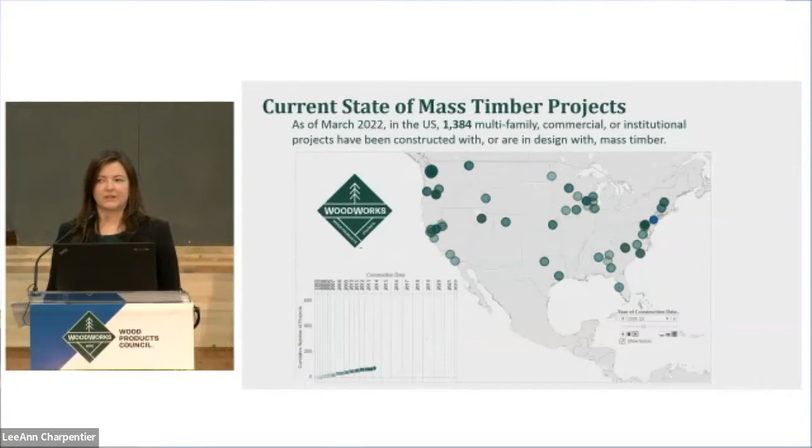We're talking about mass timber today, which is really exciting. We're seeing it really grow here in the country, and we've been tracking it. That's one of the things we do: we track projects across the country, built and in construction, and you can see that exponential growth. Mass timber is an innovative material that's here to stay. So that's what we're talking about today, and that's really exciting.

One other thing I want to mention is the WoodWorks Innovation Network. All the project assistance we do is confidential, but we wanted a way for project teams to showcase their built and in-construction projects. There are a lot of amazing project photos uploaded there. It's kind of like the Facebook of mass timber projects, I'd like to say. You can go there and see what's built and in construction around the country, and filter it by location, building type, size, material, and more. It's a great resource if you want to see what's going on.

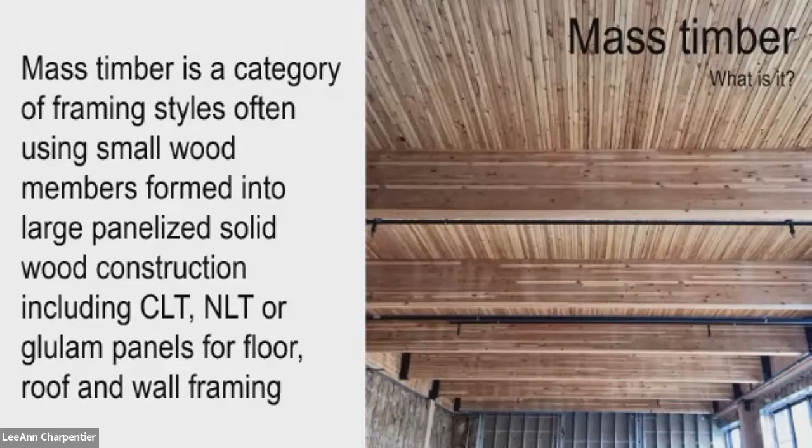What is mass timber? I like to think of the delineation between mass timber and heavy timber. Heavy timber is the historic method of construction, a solid 8x8 column, a 10x14 solid wood beam. Mass timber can have these same sizes, but it's made up of a number of smaller individual members that are laminated together, either using adhesives, nails, screws, or another type of mechanical fastening.

All right, so that's mass timber, that umbrella definition. Let's talk about some of the products. Glue laminated timber, glue lam, are often beams and columns in these buildings. We've been using glue lams for over 100 years, in light frame construction for longer spans, and now we're using them in these mass timber buildings exposed as our beams and columns.

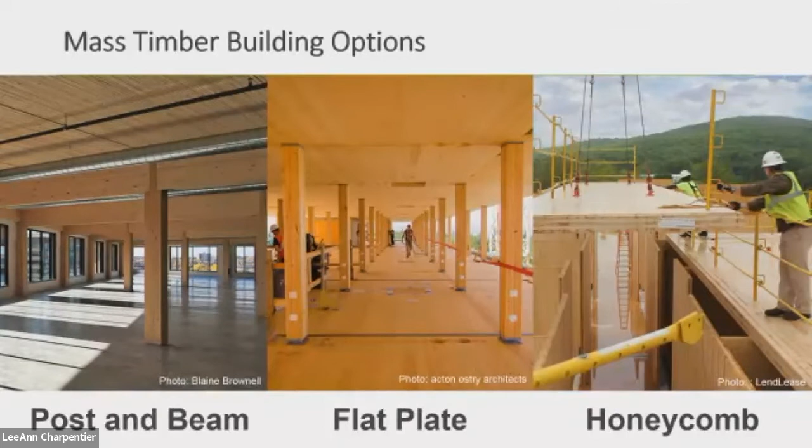We also don't have to have an entire mass timber building. For multifamily, low and mid-rise, we've seen CLT floors with prefab panelized walls used very successfully, basically replacing the floor system, the TJI joists, with CLT panels spanning to wood-bearing walls. Steel hybrid is also an option, and we've seen this in a lot of office projects. So maybe this is the best fit for a project.

I'm going to focus on CLT a little more and how it's made, since we're talking about this a lot today. For CLT, we're basically taking 2x lumber, laying them down, typically 1 and 3/8 inch thick, putting down a screen and adhesive, and then the next layer is cross, so that's how we get that two-way action. We usually have an odd number of plies, so 3-ply, 5-ply, 7-ply. The reason is those outer plies run the long direction, considered the major strength axis, and the opposite direction is the minor weak axis, going the short dimension of the panel. So unlike NLT, DLT, GLT, there is strength in 2 directions.

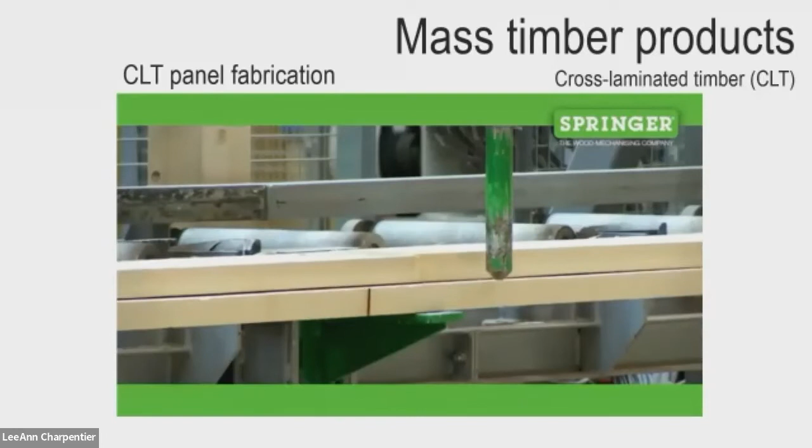I have a short video here to show you how CLT is made. We start with that commodity lumber I mentioned. The first thing they do is finger join it end on end, so we can have these longer panels. Panels are, depending on the manufacturer, 4 to 12 feet wide, 40 to 60 feet long. Those pieces are then cut to size.

Each panel is made for a specific location on a specific project. First they get that layer of adhesive down on top of the first ply, and now that second ply goes on, cross-laid. There's the door opening, or a window opening, on this panel. That third ply then gets installed, all very automated in a factory. The last step is to go through the planer, and now we have a 3-ply panel.

So CLT is all prefabricated. We're not going to a local lumber yard and saying I need 8 sheets of CLT. It's done for a specific project where you have specific panel sizes, openings, a lot of upfront coordination. Everything's done in 3D, shop drawings, and very precise, with tolerances of 1/16 to 1/8 of an inch for these panels.

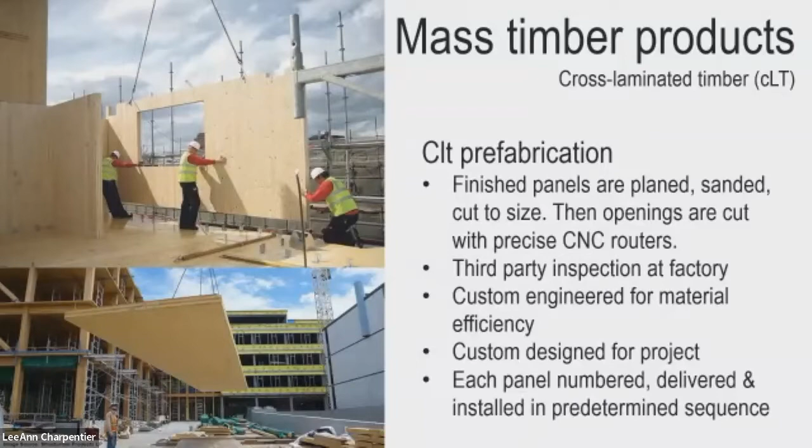We have some issues on the slide, sorry about that, but I'm going to go through some project examples now, looking at built and in-construction projects, focusing here in the Bay Area and also around the country.

One example is 1 De Haro, in San Francisco, a 4-story office building, 130,000 square feet. They had significant savings on this project because of the reduction in weight with mass timber. They took the building pretty far through design in concrete, then switched to mass timber. It's in SoMa, which has poor soil conditions, so they had to use deep foundations, and they were able to significantly reduce those by switching to the lighter weight material.

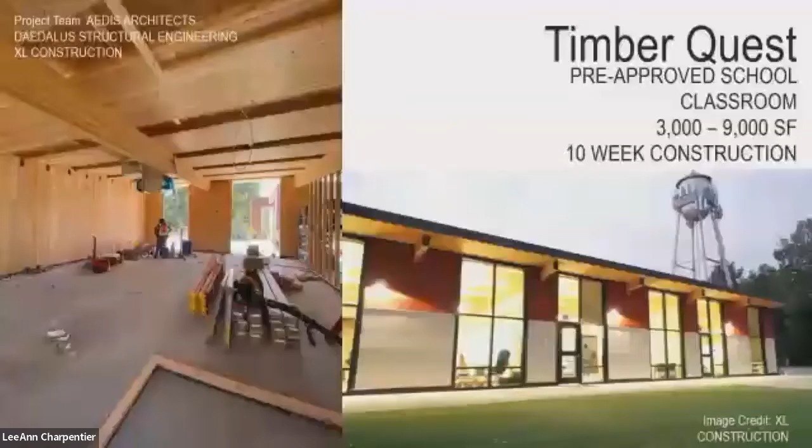A local project here, Timber Quest. Mass timber typically makes sense on a larger scale - we typically see them larger than this 3,000 to 9,000 square foot range. But this is an exciting new prefab option here in California, intended to be a classroom, and it's DSA pre-approved. It could also be a community center or other uses. The idea is to replace modular classrooms with higher quality, cost-competitive, sustainable solutions.

I think they had an off-site staging area, and they trucked the panels in place. They also trucked in the walls, which were all prefabricated off-site. The contractor said it was originally all designed with light frame wood, with a 14-month construction window. When they used the prefabricated solutions, it was cut down to a 10-month construction schedule.

All right, so thinking about tall wood now. There isn't anything in construction yet in California. We have a lot of upcoming exciting projects in design, and maybe we'll hear about them later today. But there are some projects in construction around the country using the Tallwood provisions.

So this is Intro in Cleveland, 9 stories above grade, 8 stories of mass timber on top of a 1-story concrete podium. Really big project, over 500,000 square feet, nearly 300 apartments. It has some ground floor retail and an events venue on the top floor.

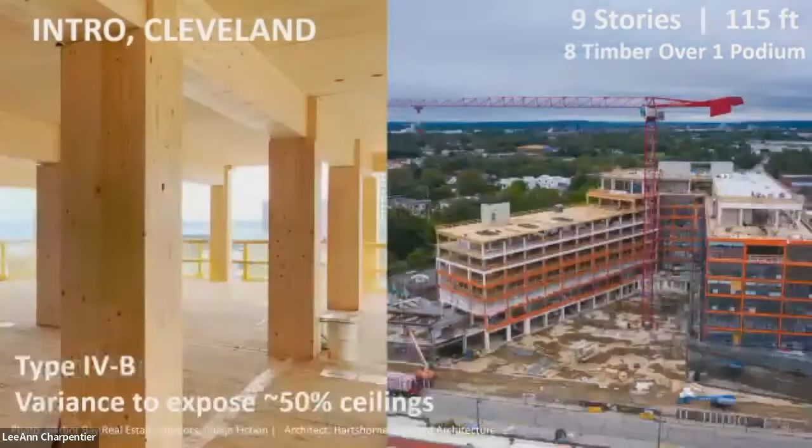So this is one of the first projects to utilize the new construction type 4B with modifications. The City of Cleveland has not adopted the new 2021 IBC Tallwood code provisions we're talking about today. So the project did need to apply for an AMMR, an alternate means and methods request, looking ahead to the coming code.

Ascent in Milwaukee is also currently under construction. When complete, it's scheduled to be the tallest mass timber building in the world, and it did top out in December 2021. So it's 284 feet, 25 stories in total.

So it is a hybrid project. The first 6 stories are concrete, 19 stories above that are mass timber, and there are concrete cores that go all the way up to the roof. You can see those concrete cores on the right.

Ascent is using a modified Type 4 approach. Along with the fire engineer consultant, they worked closely with the city to express design project goals, aesthetics, and the safety measures taken. So one of the requirements they had was to perform the first 3-hour fire tests of glulam columns, which they did at the USDA Forest Products Lab in Madison, Wisconsin. So they actually utilized some of the design requirements of Type 1A construction while incorporating mass timber.

So how do we get our required fire rating with mass timber exposed like this? This is what many of our speakers will be talking about today. I'm really looking forward to hearing about this more, but I did want to introduce it here.

Wood, as it burns—mass timber, heavy timber in particular—burns at a rate we can predict very accurately. It burns fairly slowly. As it burns, it's forming this char layer on the outside of the exposed surfaces. What that char layer is doing is insulating the inner wood, keeping it cold so it can retain its structural properties. So through numerous tests that have been done over the years, we can very accurately predict at what rate this char layer will form.

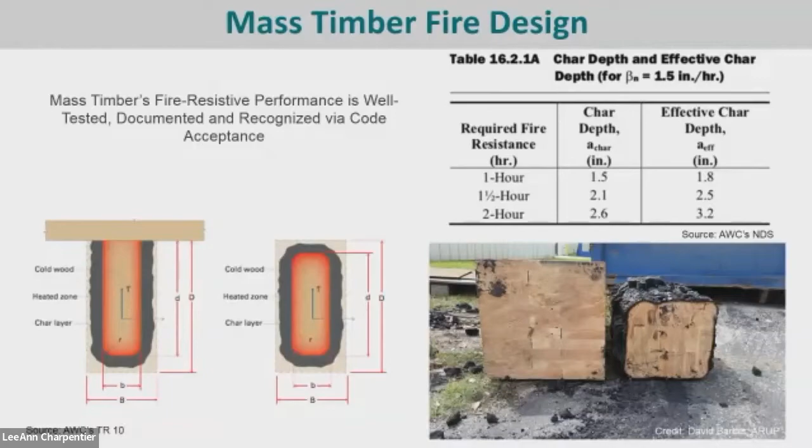All right, so let's take a look at lateral systems. Code process turns slowly—CLT shear walls are almost adopted. We do have R values in ASCE 7-22, which has been published recently. And the NDS SDPWS, our special design provisions for wind and seismic, has prescriptive detailing and design procedures.

How are those panels connected together to create that structural diaphragm? Questions that come up, particularly in California. There are a few different ways to do it.

This is most common, this plywood spline or surface spline detail. The manufacturer can leave a small section of each CLT out, or remove a portion of it on the top side. Then we're just installing the strip of plywood or thin veneer, nailing or screwing it down, tying that diaphragm together. So there are provisions in the new NDS special design provisions for wind and seismic that will be adopted in the next code cycle.

And I know project teams around the Bay Area and around the country are already starting to use these provisions, and fortunately they are being accepted.

All right, so I talked about framing approaches earlier, and we've seen a lot of post and beam around the country in different projects. So I wanted to talk about different options we have, and how differently we can solve one connection. On the left is one probably fabricated by a steel fabricator, designed by the structural engineer.

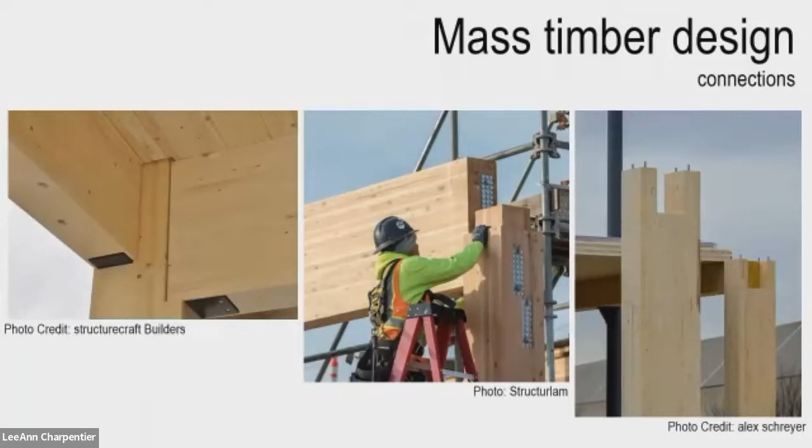All right, so acoustics - we're not really diving into the details on this today, but I do like to talk about it because it's one of the many things we need to think about in these buildings. The lightweightness of mass timber helps us for a lot of things like installation, reducing those foundations. It kind of hurts us on this acoustics. So we're going to be adding assembly on top of our panels. We won't just have bare panel. Part of that is because it's a softwood product, so it's not a durable walking surface.

So we're typically exposing that ceiling side, putting Acousti-Mat on top. There's a lot of different options for that. And then 1.5 to say 4 inches of gypcrete or concrete, and that can be your finished floor, or often we're adding in like another acoustic layer and then the finished floor on top.

All right, so the why of mass timber. Why are we talking about this here today? Why is it gaining popularity? Katie Harrell will be talking next in a few minutes here about why here for California we want to use mass timber, why we want to increase its use. But I want to just kind of touch on the overall topics.

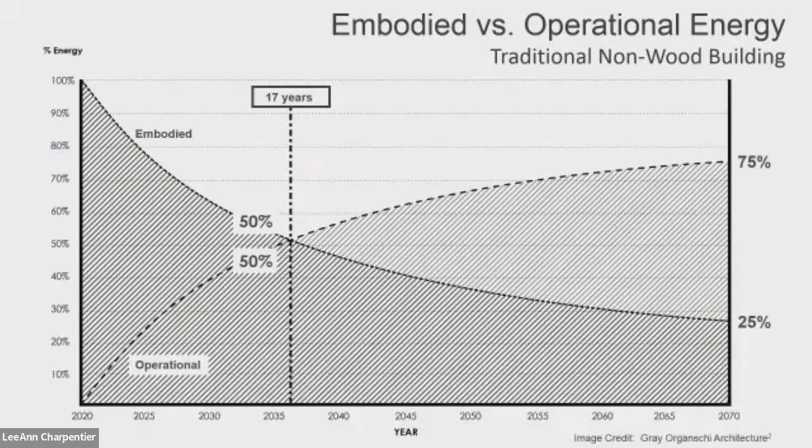So what can help with that? Wood. Wood is 49% carbon by mass or weight. So 50% of this wood is carbon that was in our atmosphere contributing to global warming, and is now physically converted into a solid form of wood and put into a building. So whole building life cycle assessments typically show wood buildings as a way to reduce the embodied carbon footprint of a structure. We do have a life cycle assessment that we recently released of a mass timber office building in Denver called Platte Fifteen.

Left to natural processes, that tree will die and decay, releasing carbon back into the atmosphere. Instead, carbon can continue to be stored by using that solid material in buildings and building products. So throughout the life of a wood building, it's basically acting as a carbon sink, storing that carbon dioxide. One thing to note - it's only sustainable if the forest is sustainable, if the forest remains a forest after the tree was harvested. Here in North America, forests have been very well maintained and stable for the last 100 years, and there are a number of regulations that ensure this. That's something Katie Harrell will be talking about more shortly, forests here in California.

Another why for wood, for mass timber, is exposing it, biophilia. It's this innate human instinct to connect with nature. We feel good around wood. Studies have shown it. We also hear from developers of mass timber projects that they're seeing faster leasing and higher lease rates, and this is shown in our business case study available on our website.

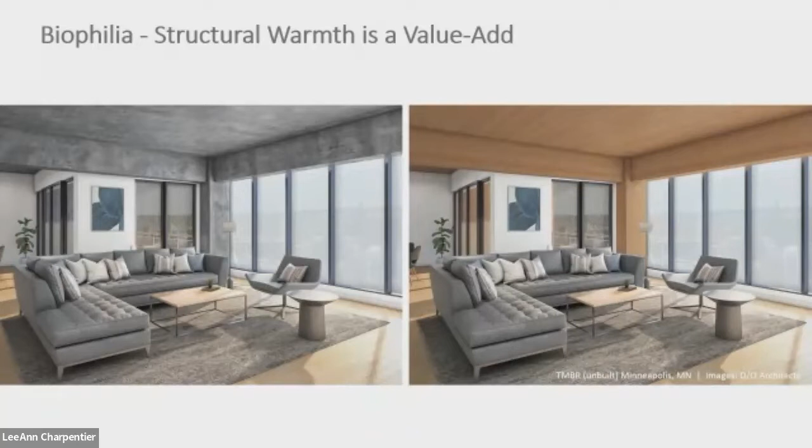Another driving factor, or why, of mass timber is worker availability and shortages. It's existed for many years, driven really by the recession of 2008 and 2009, and the construction industry never really recovered from that. Coupled with urban settings, where labor tends to be very expensive, mass timber is a way to integrate off-site construction. The crew on-site can be smaller, and we're creating more jobs off-site in a safer work environment.

This point ties to the previous one. Compressing construction schedules will reduce the requirements of labor, requiring less time of folks on site. Time is money, and mass timber helps with this. It requires a lot of coordination up front, but when it gets to site, it goes up like a set of Legos or IKEA furniture—very quickly. A feasibility study on a 12-story tower in Seattle compared a concrete construction schedule to a mass timber construction schedule for the same project, and they determined there was a 5-month savings with mass timber.

So that's our market drivers, the why of mass timber, and I think we'll be hearing more about some of these today.

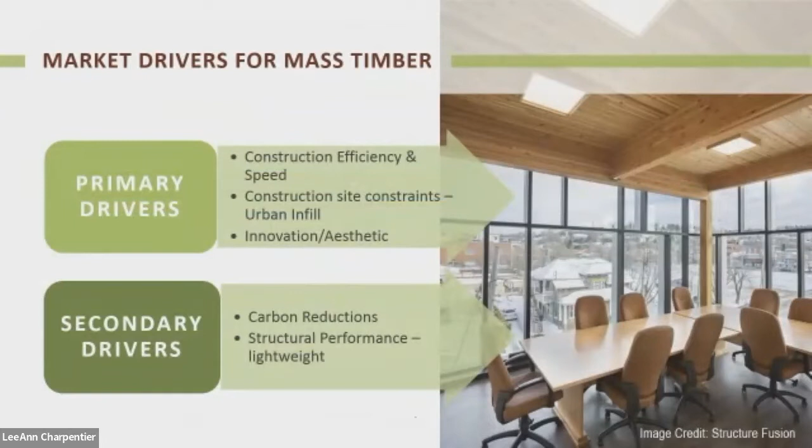All right, I'm just going to touch on the code briefly. We're going to hear more about the code from other speakers, but I want to introduce some ideas here. A question comes up often: is CLT in the building code? People ask me that, and the answer is yes. It first arrived in the 2015 IBC and 2016 CBC. It's defined in Chapter 2 as a structural wood product, and it's referenced in Chapter 23 as an acceptable building material when manufactured according to the PRG 320 standard.

So how tall can we build? Before the Tallwood code provisions that will be discussed more today, we were limited to 6 stories for business office occupancy, 5 stories for residential, and 85 feet, with type 3, type 4, and type 5 construction types. The nice thing is we can add mezzanines, and we can put it on a podium. So we do have options to make bigger buildings, but we wanted to go taller.

So in 2016, the Tallwood Ad Hoc Committee was created to explore this here in the States and push forward new code provisions. Five full-scale mass timber fire tests in a multi-story apartment building were conducted at the ATF lab in 2017, and Ray Obrockie from AWC will be speaking more about these tests in depth in about a half hour. Given the success of the tests we'll be looking at, the Ad Hoc Committee proposed 17 revisions to the IBC, and they were included in the 2021 IBC. All of them passed.

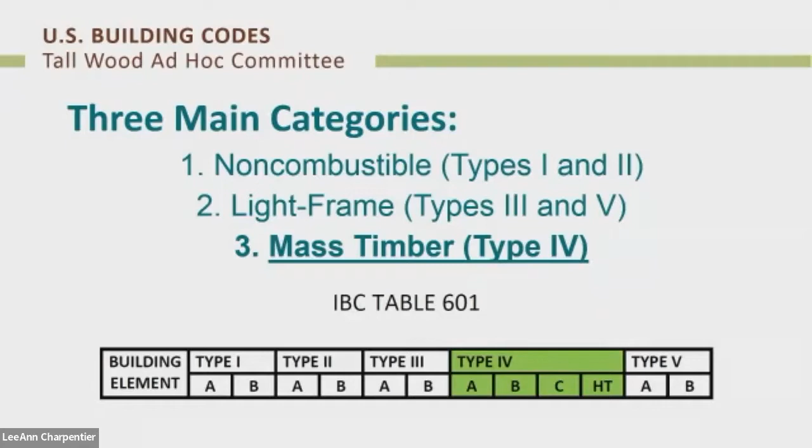So we have 3 new construction types, under the type 4 construction type. We didn't want to touch the existing type 4, so that became type 4 HT, type 4 heavy timber. Now we have type 4A, B, and C, and we can see how tall we can go with this. Type 4A allows up to 18 stories, type 4B up to 12 stories, and type 4C up to 9 stories. The differences between these really come down to increasing fire safety the taller we get, so type 4B and 4C have lower fire ratings compared to type 4A.

And there's also this new concept of exposure level in mass timber—how much timber can we expose? These were adopted early here in California, and we have Chief Greg Anderson with us today. He's the Chief of Code Development and Analysis for CAL FIRE, and he'll be speaking more about the specific adoption here in California.

I do like to share this quote from our State Fire Marshal, Chief Mike Richwine. He says the early adoption of mass timber codes can benefit California in many ways, but I'd like to highlight three. It has the potential to increase market demand for mass timber production in California to meet the needs of the construction industry. It will increase the pace and scale of our wildland fire prevention and forest management goals of treating 500,000 acres per year by thinning the forest to smaller diameter trees that can be used in the production of cross-laminated timber and other mass timber assemblies. While wood products provide the benefit of storing carbon, another advantage is that mass timber construction can help reduce the carbon footprint of concrete and steel production.

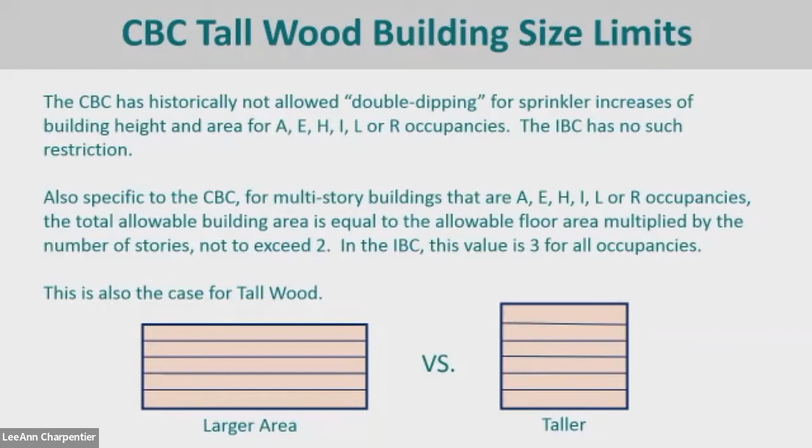Also specific to the CBC, for multi-story buildings the total allowable area equals the allowable floor area multiplied by the number of stories, not to exceed 2, for those same occupancies specifically. This value is 3 in the IBC.

So what does that mean? For example, if we're using the sprinkler area increases, the allowable height in the CBC is 20 feet and 1 story less than the IBC limits for these new construction types, as with all construction types. When we add sprinklers, no sprinklers were limited to 65 feet across the board for all these.

Let's say we take a residential building, we want type 4B. We can either take that area increase, so we lose that top story—we have 11 stories allowed, 160 feet. We have 123,000 square feet allowed per floor, but the max total building is 2 times that. So that's the big number at the bottom, 246,000 square feet total—that's our total building area allowed.

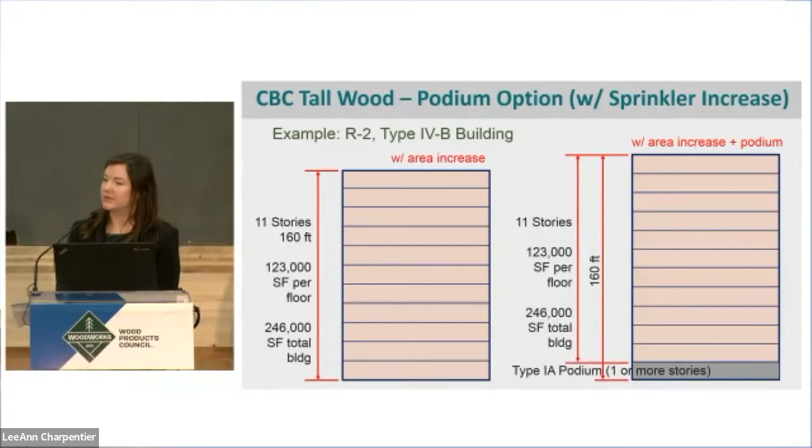All right, so that's all I have for you, this intro to mass timber.

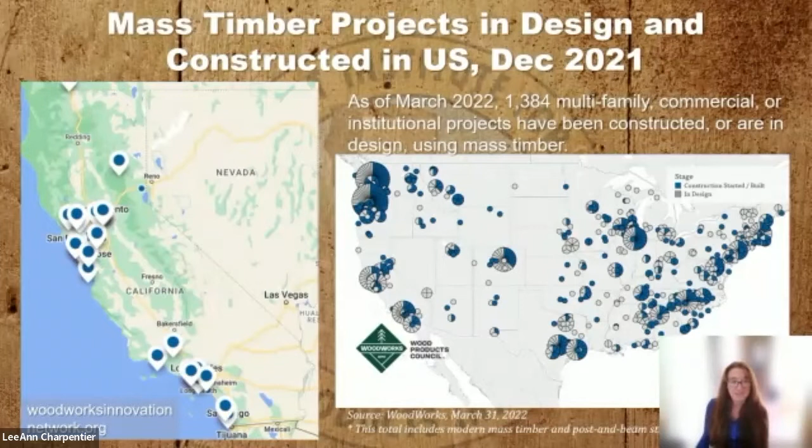As of December 2021, there are 199 mass timber projects in California that either are completed or are underway, more than any other state in the country. Washington is next at 126 projects, and Oregon is in third at 94 projects, with Texas close behind Oregon. Really, this slide is just to highlight the demand and interest in the state are clearly here for mass timber.

The Joint Institute for Wood Products Innovation is another indicator the state is committed to increasing the use of innovative wood products. We first convened in 2019.

We have 2 co-chairs, the chair of the California Board of Forestry and Fire Protection, and the California Natural Resources Agency Deputy Secretary for Forest and Wildland Resilience. We have 2 academic members and 11 council members with various areas of expertise, including forestry, industry, tribal interests, and finance. We're dedicated to providing California forest product information, research, and analysis to increase economic drivers for healthy forests.

Our areas of focus include long-term ecological and economic sustainability, education and outreach, increased forest resilience, long-term carbon storage, local economies, and industry retention and development in California.

Our first report was a literature review and research gap analysis of innovative wood products, which we released in 2020 and hired UC Berkeley to produce. Findings included identifying mass timber as a current, promising market-ready innovative wood product.

As a result, we funded research with the Tallwood Design Institute to look at cross-laminated timber layup tests using white fir species. We tested 2 different product layups using lumber grades 2 and 3 or better, with the intent of informing industry looking to come to California.

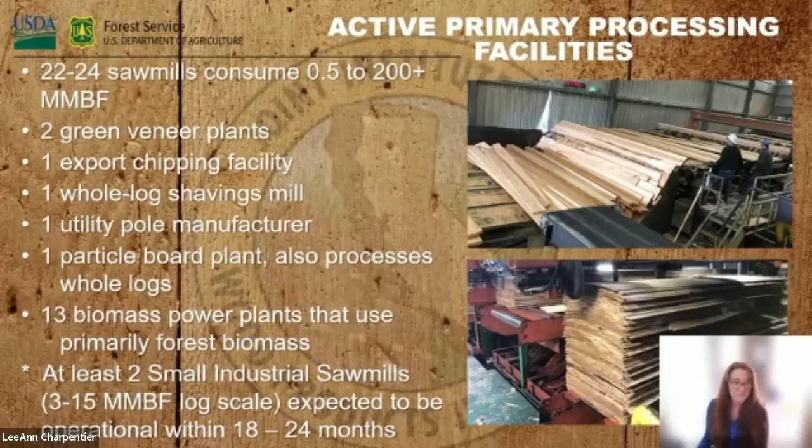Recognizing the need to implement a comprehensive statewide plan to address issues such as a lack of wood processing capacity and other forest health related issues, the state developed the Wildfire and Forest Resilience Action Plan, released in 2021. It includes areas of focus, one of which is wood utilization, and it advances California's sustainable forest management goals. It lists the action items that need to be met and will get us to where we need to go for each topic. Wood utilization items include helping to attract and support private sector investments for an expanded wood products market.

The Climate Catalyst Fund, based at iBank and the Governor's Office of Business and Economic Development, is one of the programs in the action plan. Its goals are to engage investment opportunities, provide technical assistance across all 58 counties, and emphasize inclusive prosperity in the climate transition. It has $74 million available, of which $47 million is available in loans for forestry projects, such as advanced energy products, existing and emerging construction materials, and supporting infrastructure and industries needed to make such products viable.

The intent of the loans is to help stand up a more robust wood product sector in the state, reduce wildfire risks, promote forest and watershed health, and contribute to more climate resilient communities and economies. The fund makes public dollars available to help bridge financing gaps currently preventing technologies from scaling into the marketplace. When recipients pay the loans back, those dollars return to the fund for other projects that need gap financing.

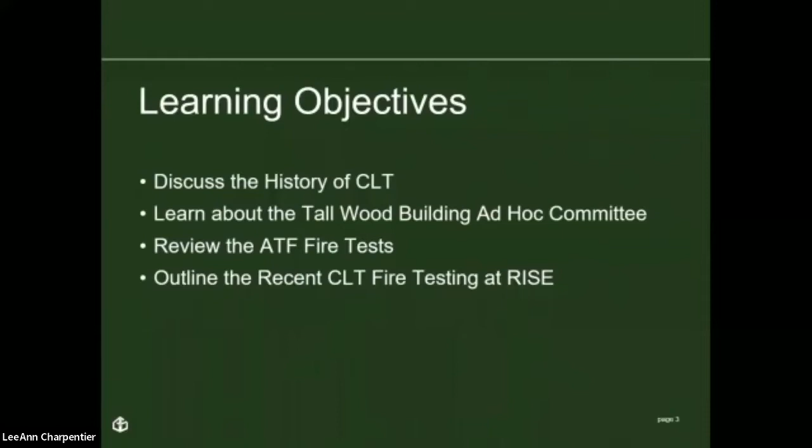We're going to discuss the history of cross-laminated timber. We're going to learn about the Tall Wood Building Ad Hoc Committee, because the testing originated out of the fire working group of that committee. We're going to review the ATF fire test, and then outline the most recent CLT fire testing at the Research Institute of Sweden.

Mass timber as a separate building system was really born because of one new product, cross-laminated timber, or CLT. CLT represents a sea change in wood construction because of the new structural and fire resistance characteristics it represents for wood construction. Never before have we contemplated solid wood floors and wall sections used in a similar manner as concrete walls and floors.

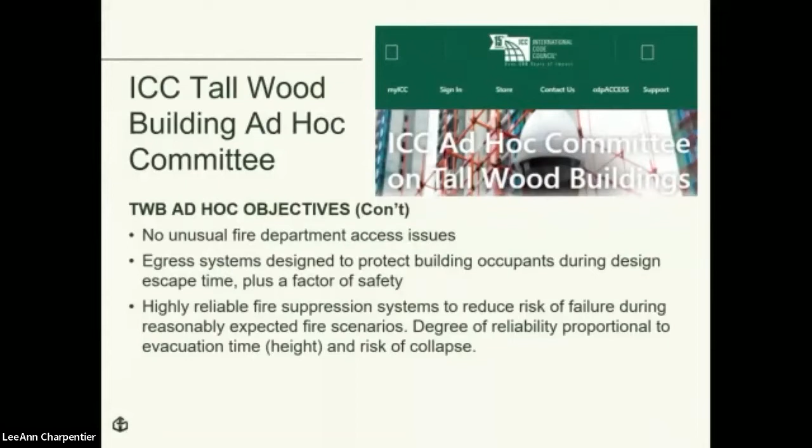I say the word weighs in the present tense because after the fire test series was over, the CLT was salvaged and repurposed for construction of residential buildings by architecture students at Yale University. So as you can see, CLT can be used in a horizontal application, like a floor or ceiling, or a vertical application as a wall.

Early on, the Tall Wood Building Ad Hoc Committee recognized it would need fire testing to validate its proposals. So the fire work group developed fire test scenarios, including the physical layout of the test structure, the configuration, and the fuel load.

The test structure represented a multi-story condominium in which each unit had interior dimensions of 30 by 30, with modern furnishings, not legacy furnishings - modern furnishings being a lot of polystyrene, foam, and plastics instead of the traditional natural fabrics and cotton batting. The fuel load was based on a North American study of fuel loading for residential use groups. They took the mean average of that study, added one standard deviation, and came up with 570 megajoules per meter squared as the fuel load.

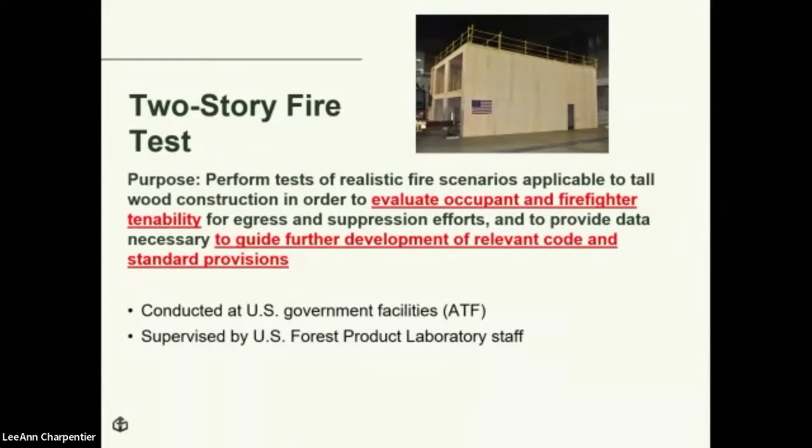As I said before, the 570 megajoules per meter squared is essentially equivalent to about 400 gallons of gasoline, energy-wise, when you look at it.

So here are all 5 of the fire tests. Test 1, the so-called baseline test, had all mass timber surfaces protected with 2 layers of 5/8 inch type X gypsum wallboard, which is a fire-rated gypsum wallboard, so none of the CLT was exposed. This also did not have sprinklers, and there was no intervention to suppress this fire.

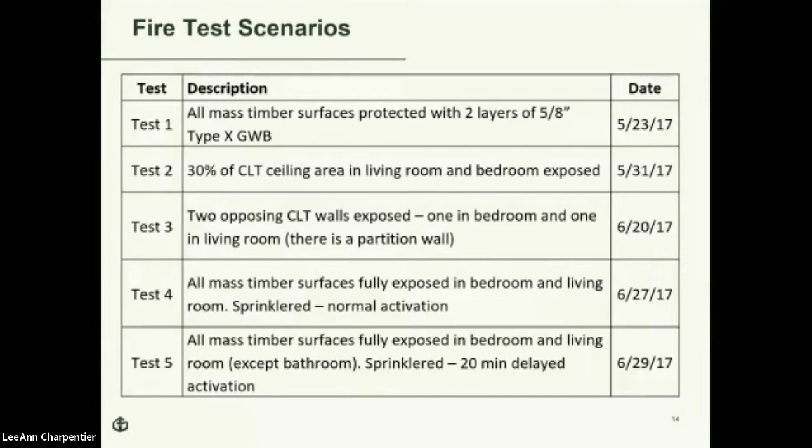So each unit had plumbing, mechanical, and electrical penetrations, but no utilities were connected. They also had through-penetrations that were fire stopped, just to examine the efficacy of that requirement for mass timber.

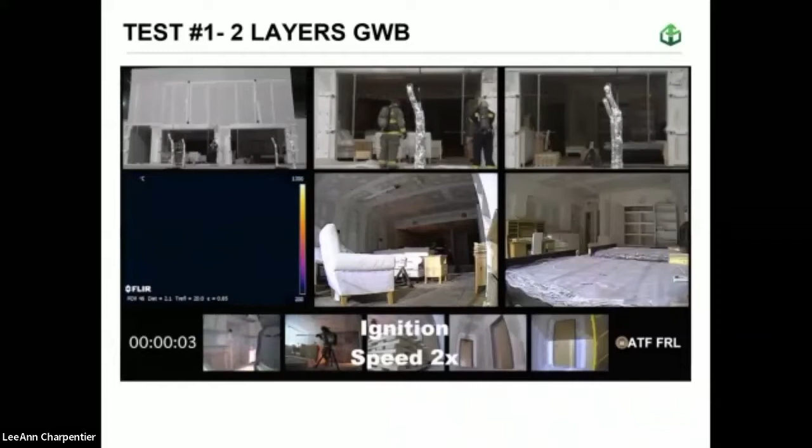So all of the fires were started in the same fashion—with a propane torch that lit gasoline-soaked rags off in a pan in a corner base cabinet of the kitchen. And as I said, these things were fully instrumented; there were 420 channels of data collected during each one of these fires.

Also note, down in the lower right-hand quadrant, you have the 20-minute door to the hallway and the 90-minute door to the stair tower. So the fire starts very quickly.

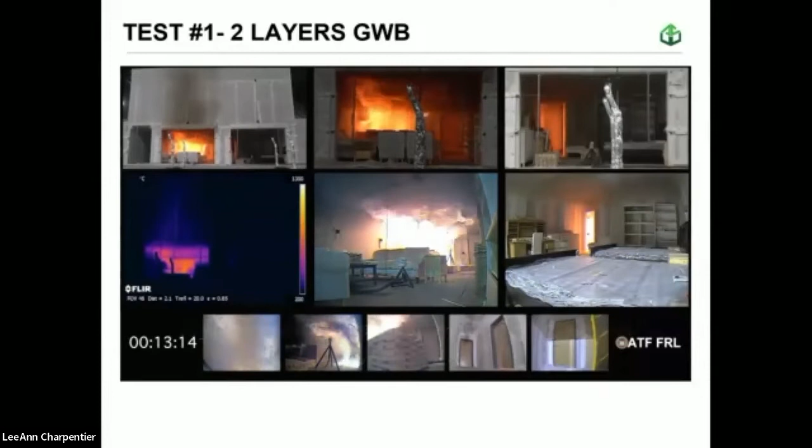As I said, that 570 megajoules per meter squared was the fire load. Now, the original test protocol called for glazing on the front of these openings, but the engineers at the ATF lab wanted a high-intensity fire, so they left the glazing out to create more ventilation.

Now you have the living room and kitchen in flashover right now, at around 13 minutes. Flashover, for laboratory purposes, was 600 degrees Celsius, 1 inch from the ceiling, which is about 1112 degrees Fahrenheit.

So you're going to see that the door was left open between the kitchen and the bedroom. The bed is starting to off-gas now, and this room will be fully involved within 17 to 18 minutes. You see a little bit of smoke in the hallway, none in the stair tower. That 20-minute door actually lasts a lot longer than 20 minutes.

So now we have a fire that's absolutely free burning. It's in full flashover condition. This fire actually got to 23 megawatts.

And to put that in perspective, a really hot campfire—one you can stand next to for a couple of minutes—is like 300 to 500 kilowatts. So this is like 45 times the intensity of that.

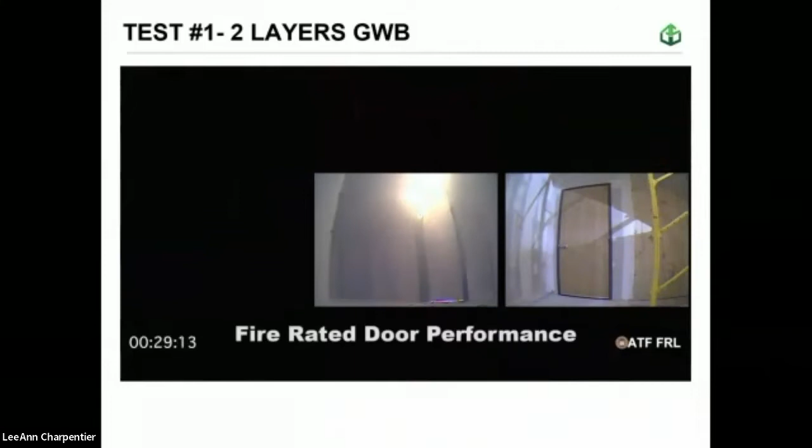So you see a little bit of fire coming through that 20-minute door, which is hanging in there for now 35 minutes. It's going to hang in a lot longer—it's not going to fail until almost an hour when it comes to staying in the door jamb.

So this wasn't the first generation of CLT fire testing. There was actually testing at NIST.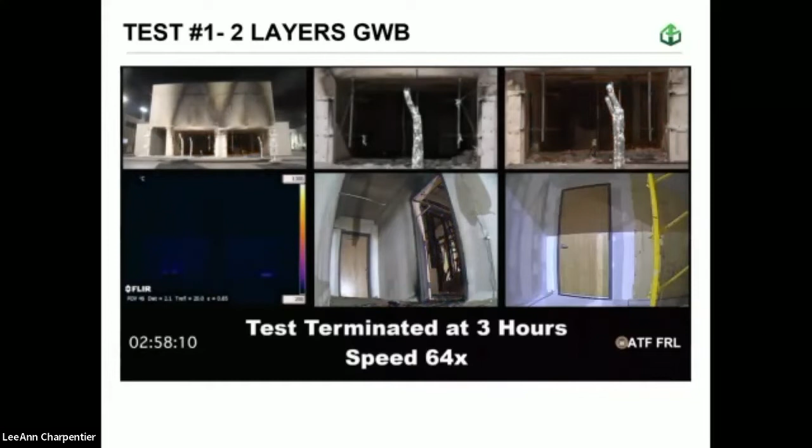You see the fire is well into the decay phase when the door fails. No smoke or flame even enters into the hallway. The hallway was very tenable the whole time for occupants to get out, firefighters to get in. The test is terminated at 3 hours, and you can see that it didn't leave the compartment of origin.

These are just still photos. The fire ignites, flashes over around 12 and a half, 13 minutes. At the peak heat release rate, over 20 megawatts.

The fire was allowed to burn without intervention. You can see in the bedroom and the kitchen, all of the contents were completely consumed by the fire. The ATF firefighters didn't clean out this compartment. Everything was completely consumed. That's how intense this fire was after about an hour and a half.

Now, test 2 exposed 30% of the ceilings. They also used barrels over top of that exposed portion of the CLT. They wanted to see what a live load would do to the exposed CLT.

This test starts the same exact way. It's in the corner base cabinet of the kitchen. 30% of the CLT ceiling area in the living room and bedroom was exposed. That amounted to 20% of the overall ceiling area.

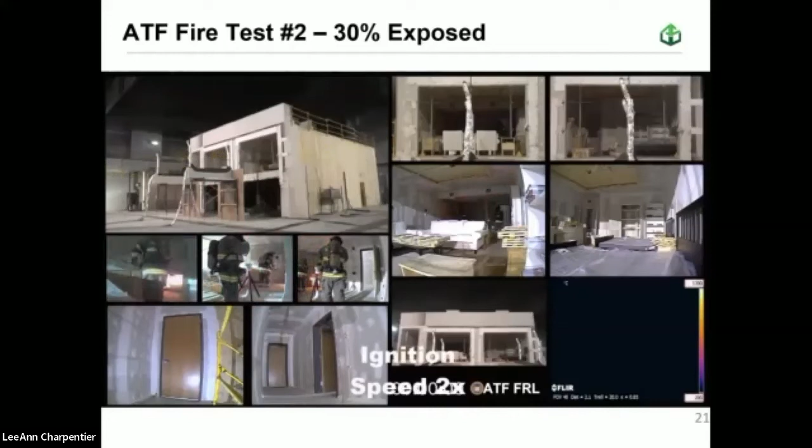If you noted in the last test, the steel studs and the gypboard wall partitions that were in between the glulam beams and columns were completely consumed by the fire.

It should be noted that no combustible materials are allowed in concealed space areas. So you can expose the ceiling, but you can't enclose it into a concealed space. That's part of the adopted codes. And actually, this has 30% of the ceiling exposed.

I'm going to telegraph that the code now allows for 100% of the ceilings exposed in the 2024 edition of the IBC that I'll talk about, and that came out of the RISE testing.

In 2016, the first Tallwood building, known as Brock Commons Residential Hall, was started at the University of British Columbia in Vancouver, Canada. That's 18 stories, and that was the tallest structure in North America utilizing mass timber.

There's currently a building almost complete in Milwaukee called the Ascent that's going to be 25 stories. It's 19 stories of CLT over top of a 6-story cast-in-place concrete podium parking garage.

So right around 12-13 minutes in test 2, you see flashover in the living room kitchen. It starts to also spread into the bedroom. This test goes very much like test 1.

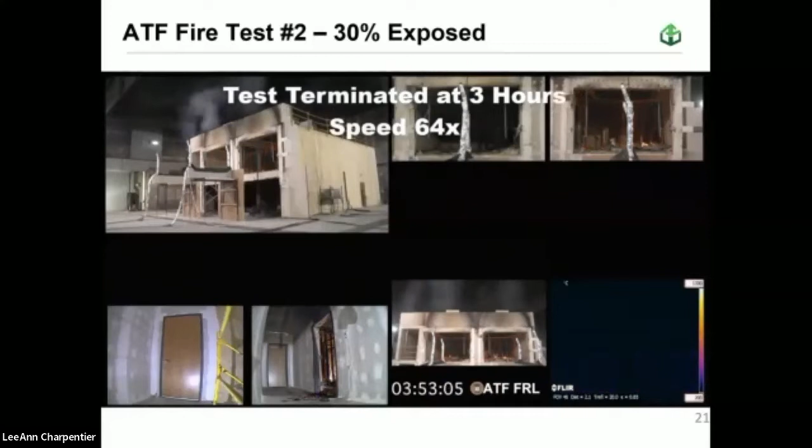Once again, these are just still shots of test 2. Ignition, flashover in the bedroom all occur roughly around the same time. But notice the char formed on the exposed mass timber ceiling area, which was expected.

This photo shows the sample cross-section, which was taken from the exposed CLT ceiling following test 2. In this sample, the char had actually been scraped off in order to get a clearer measurement on the depth of char. This was a 5-ply CLT Douglas fir larch species Cross-Laminated Timber, and had 5 laminations. So if you count from the top down, you see lamination 1, 2, 3, 4. This fire burned for 3 hours and never even made it to the first bond line of the first lamination.

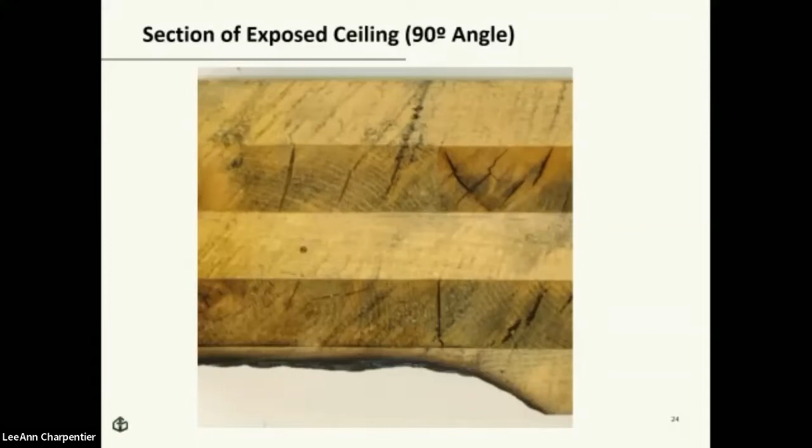So this is the test layout for test 3, which had 2 exposed walls, one in the bedroom, one in the living room. For the sake of time, I'm not going to show the video because it pretty much goes the same way as the first 2. It burned for 3 hours. There was flashover in the living room and in the bedroom right around the same time. The exposed walls charred, and the only thing notable in test 3 was that there was a mistake in the way they installed the 20-minute door. It failed at 17 minutes, but still the fire did not spread into the hallway.

Now, test 4, this one I say is probably the most real-life example because it is fully sprinklered, and type 4A, B, and C construction has to be fully sprinklered. The sprinkler system activates normally, and the fire gets put out.

Also they have glazing on tests 4 and 5. Most people don't have a big 8-10 foot wide portal opening in the front of their apartment. So this one, to me, is the most realistic test. I never used to show it because it was the most anticlimactic test. The fire breaks out of that base cabinet and the sprinkler puts it out almost immediately. But my good friend Shane Ray at the National Fire Sprinkler Association told me to put it back in because it shows how great his sprinkler systems work.

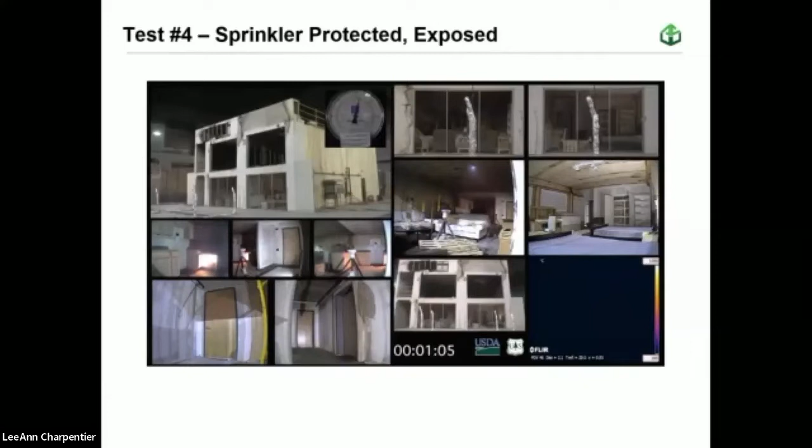Now, the front wall has glass on it, like I said, and fire sprinklers, according to the National Fire Protection Association, operate effectively 93% of the time. So that's a pretty good percentage. That's why tests 1, 2, and 3 were, like I said, highly unlikely scenarios where the sprinkler system would fail, and if it did, nobody responded. In this test, I feel, is the most accurate test on how, in a sprinkler building, with all things being equal, things would go.

You see those tripods set up in some of the tests. Those were deluge valves. The ATF was worried in tests 1, 2, and 3 that the fires got so high in intensity that it might damage their hood system, because in the ATF lab they have a big hood over it, and they were worried about damaging it. It was an abort button. They never had to hit it, but they had it there. You see right at the 2-minute mark, the fire breaks out of the base cabinet and the sprinkler system extinguishes it immediately with just one sprinkler head activating.

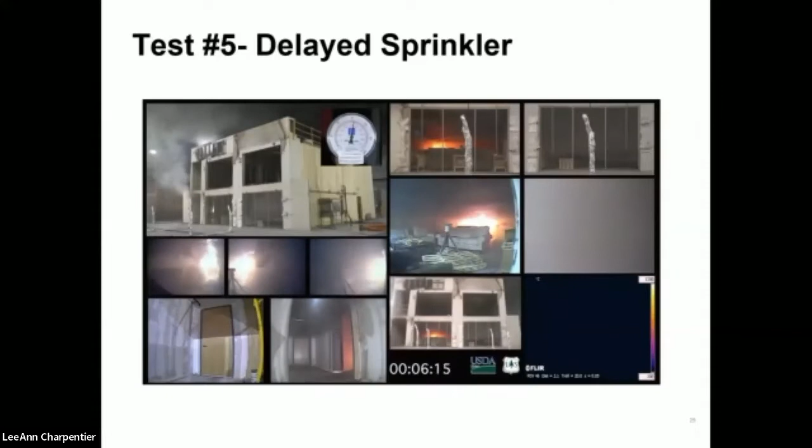Now, test 5, this is where they delayed the sprinkler system by 20 minutes. Actually, in reality, it was delayed by 23 minutes. This was to simulate a sprinkler failure and a fire department response charging the fire department connection. But what it was really trying to test was, if the fire got a head start on the sprinkler system, could the sprinkler system overcome the head start the fire got. Now, in tests 4 and 5, I also forgot to mention, they left all the doors open: the door to the hallway, and the doors to both rooms.

So as you can see, the fire is starting. I think it reaches almost flashover, it does reach flashover in the living room, almost into the bedroom, before the sprinkler activates. This one was to try to see what the sprinkler system would do if the fire got a head start. Also, all of the CLT was exposed where it was allowed to be exposed by the code. So you see the fire set off the sprinkler system at 23 minutes. The sprinkler system puts it out, about 7 heads activated, and effectively extinguishes the fire. But you can't expose all CLT because you can't have exposed wood in bathrooms and kitchens. So you have to cover that, but it has nothing to do with fire safety, it has to do more with hygienics.

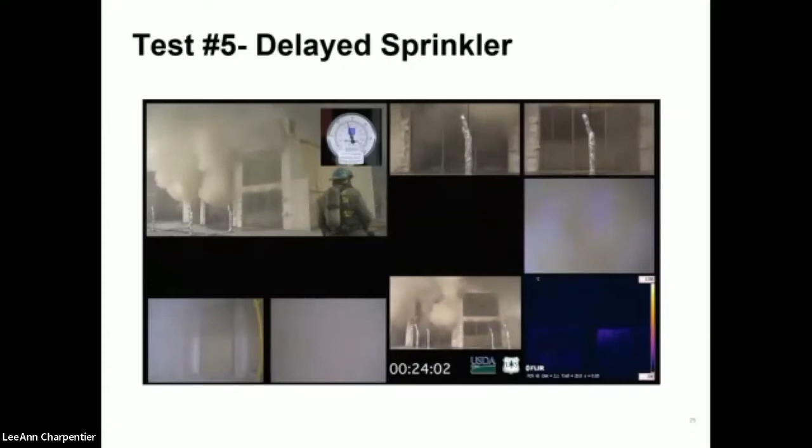So as you can see, all the mass timber surfaces were exposed. The sprinklers extinguished the fire successfully. It was a pretty straightforward test.

Flashover in the bedroom was even more consistent at around 17 minutes. So what this really says is that building construction has nothing to do with flashover times. Flashover is really driven by contents, and because the contents of every test was the same and consistent, the flashover times were the same and consistent. So it didn't matter how much CLT was exposed - the times were consistent because the contents were consistent.

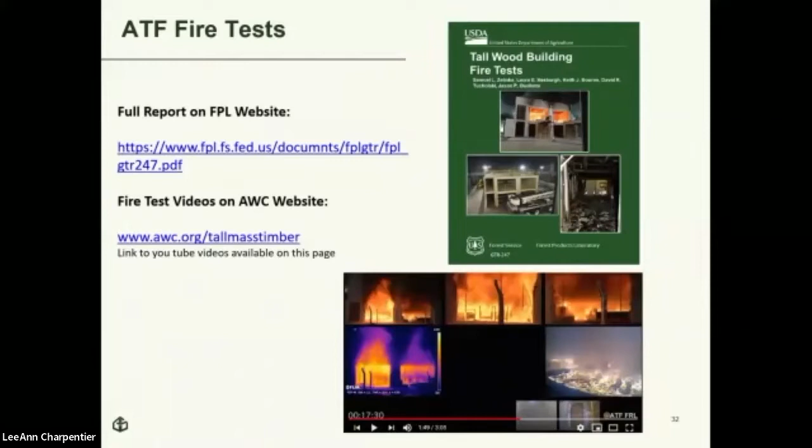And you can see flames in the hallway, compartment door failure, and then in test 3 you can see there was a door frame installation error. So if you want to read the full report on this, these are the websites you can go to. You can see the test videos at the American Wood Council website, www.awc.org/tallmasstimber. Now I want to talk about the research at RISE.

The research recently completed at RISE involved compartment fire tests that were similar in many ways to the tests performed at ATF in 2018, except for 2 very important differences. First, unlike the ATF fire tests performed in 2018, the RISE tests were performed using PRG 320-2018 compliant CLT.

As you can tell by now, our discussion on prior slides is a key point that the newer generation of CLT made it possible to achieve the second major difference from the ATF fire test. To go back, the original fire testing that occurred at NIST that I talked about, the CLT didn't perform that well - it delaminated. It came apart and created fire regrowth in a second flashover. So they went back and said, listen, we need better adhesives to adhere the CLT together, something that is heat resistant.

And they came up with the ANSI PRG 320 standard, which I'm going to talk about later. But at the time of the ATF fire test, there wasn't any PRG 320 compliant CLT available, so they changed the configuration of the CLT, and that's how they performed the fire test. They wanted to figure out exactly how much mass timber could be exposed safely. So in developing the mass timber provisions for the 2021 I-codes, the committee wrote provisions requiring the CLT to be compliant with PRG 320. The standard includes mandatory adhesive qualifications that preclude the use of adhesives that exhibit heat delamination leading to fire regrowth.

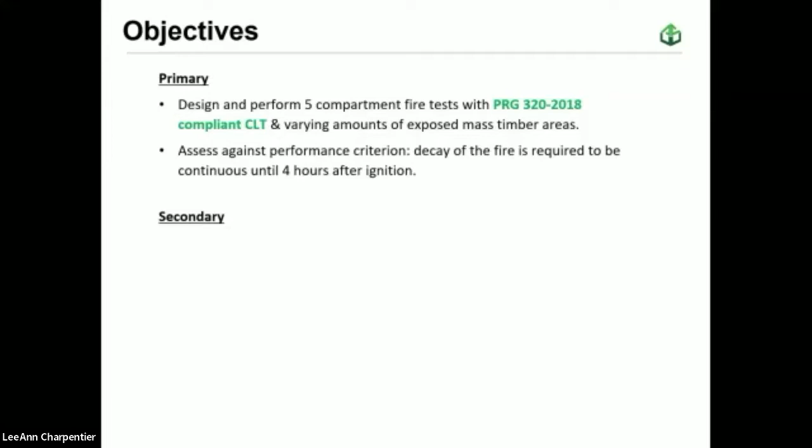But they had secondary objectives. One was to design and test intersections between exposed mass timber members. They want to record facade exposures, allowing for comparisons with standard facade testing methods. Every country tests facades a little differently. In this country, it's NFPA 285 that's the test standard used.

They also wanted to look at their predictive modeling. The fires at the ATF lab were fire modeled a month before the actual test, and it was pretty good how the modeling lined up with the actual test results, but they wanted to see if they could improve it. And then there's a case study for restoring exposed CLT members after a fire. I always get a lot of questions on what happens if it gets damaged - how do you repair it? So in all of the tests, the ceilings were exposed, and the beam under the ceiling was exposed.

The gypsum wall board is represented in red on this diagram. Test 1, only the ceiling was exposed, along with the beam under the ceiling. Test 2, the walls were exposed. Test 3 had intersecting walls and ceilings exposed. Test 4 had a larger opening factor.

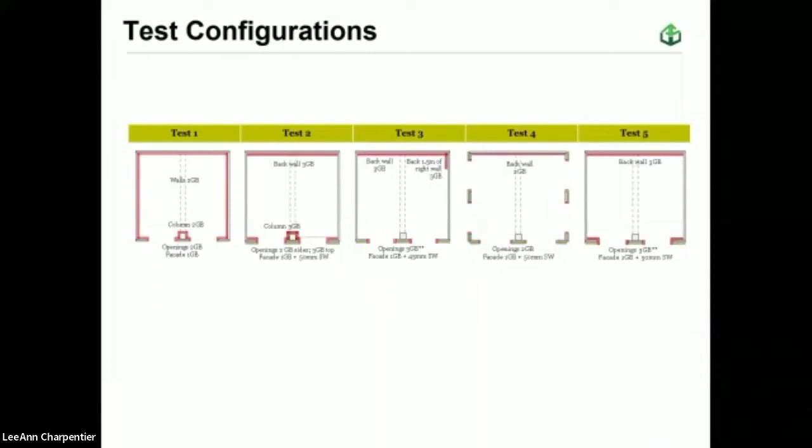The opening factor in Tests 1, 2, 3, and 5 was the average for residential structures according to a study of 700 residential structures in London. Test 4 had an opening factor consistent with the average for business occupancies.

So the configurations were based on a combination of things. What they did was they did Test 1, then got together and looked at the performance of that test, along with modeling predictions. In the opinion of the steering group, they created the configuration of the gypsum wall board for Test 2. After Test 2, they did the same thing - testing one configuration before changing it for the next.

The fuel was typical apartment furniture, supplemented with wood cribbing. Test 4 actually decayed the quickest and had the largest opening.

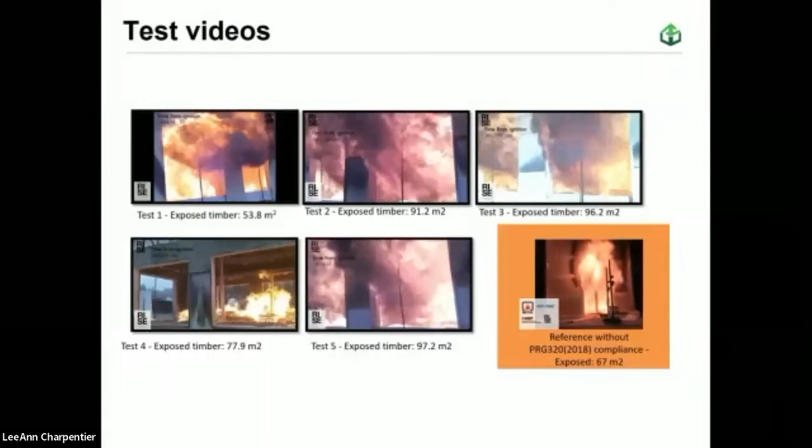In Test 1, the fire decayed 22 minutes from flashover. Tests 2, 3, and 5 decayed about 6 to 8 minutes after Test 1. Tests 1, 2, 4, and 5 all decayed steadily until the 4-hour mark, just as the performance objective states. Test 3, the fire did not decay and still had flaming in the lower left and right walls at the 3.5-hour mark - it had exposed intersecting walls not present in Test 5.

Even though it did not pass the performance criteria, Test 3 performed significantly better than the CLT in those earlier NIST tests that I was talking about.

Several measurements were made during the test, as would be expected - about 2,200 degrees Fahrenheit at its peak, down to 120 degrees Fahrenheit in 4 hours. That was a steep decline after 30 to 40 minutes. Test 4 decayed the quickest because it had the largest opening factor. Test 3 did not pass because the fire never fully decayed by the time the test was stopped.

Just a couple of graphs here showing the loss of mass and heat release rates for the 5 tests, each represented by a different color.

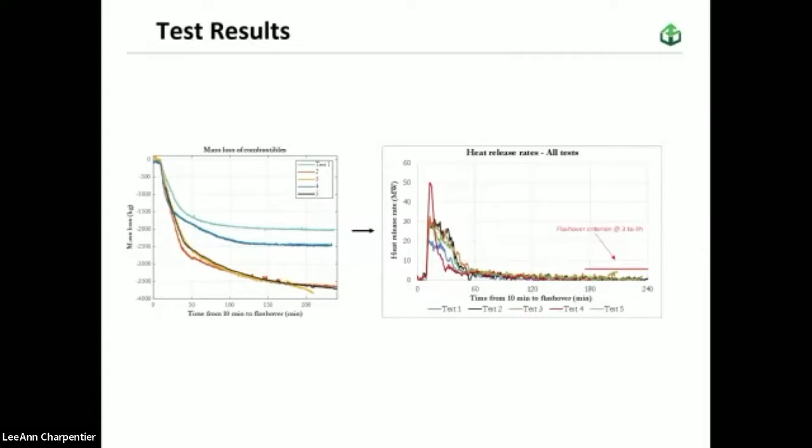Even Test 3 is under the NDS standard for char depth on the ceiling, even though it didn't pass the test. This graph represents the char depth on the walls for the 5 tests. As you can see, Test 3 exceeded the NDS char depth standard.

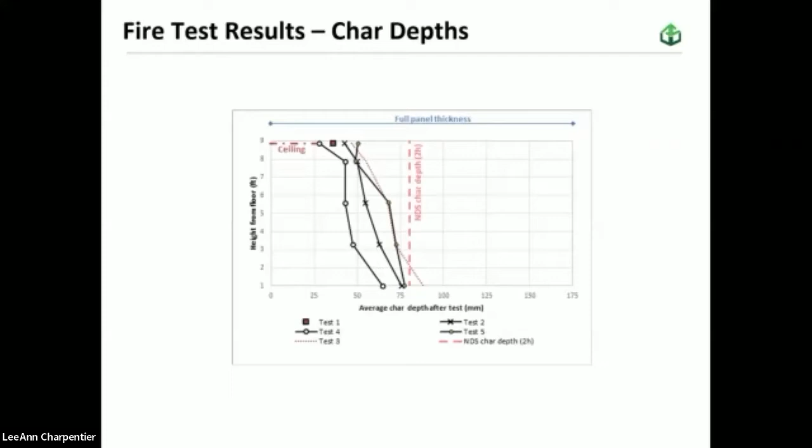For those who don't know what the National Design Specification for Wood Construction is, it's developed by the American Wood Council Wood Design Standards Committee, and it's been approved by ANSI as an American national standard.

There were 7 different connecting design methods, with varying methods for sealing the connections. The goal of the seal is to prevent the flow of hot gases, and the connections are protected within the wood.

All the airtight sealed mass timber intersections were effective to prevent fire spread. One of the design intersections had, locally, no airtight seal, and this led to smoke and flaming through the intersection.

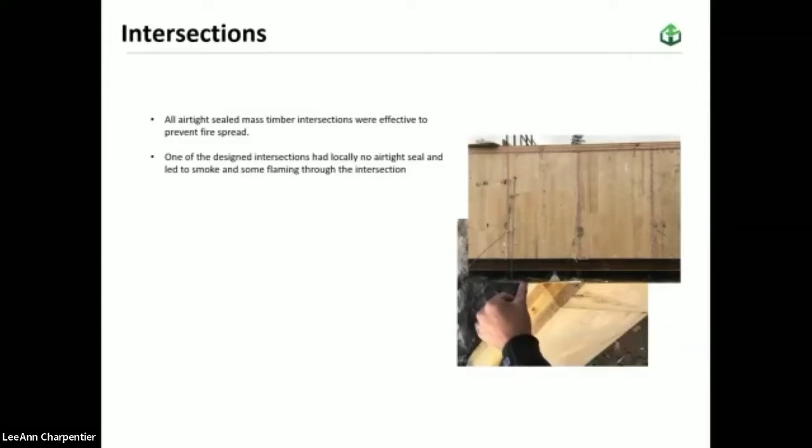So you have to allow for geometrical tolerances, they have to be accounted for. The sealing material doesn't have to be resistant against elevated temperatures if it's positioned in a well-insulated location.

They also wanted to compare different facade testing methods with CLT, using different test methods from different countries. The British BS 8414 test was the most representative of real fire behavior, while the Swedish test was the least representative. They also compared the facade exposure test to the NFPA 285 standard.

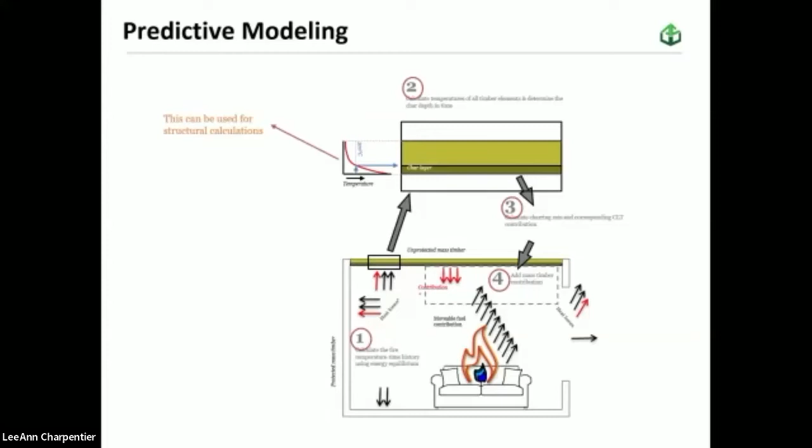They also wanted to improve their predictive modeling. After the tests, they analyzed the results and updated the model. This diagram basically informs how the model works. The main updates after comparing a priori modeling to test results resulted in changes to radiant interaction after flames disappear, inclusion of char oxidation after flames disappear, and oxygen reaching the char surface.

Now, one of the more important aspects of the secondary objectives was a case study for restoring exposed CLT members after a fire. Okay, and this is just a video that was put together.

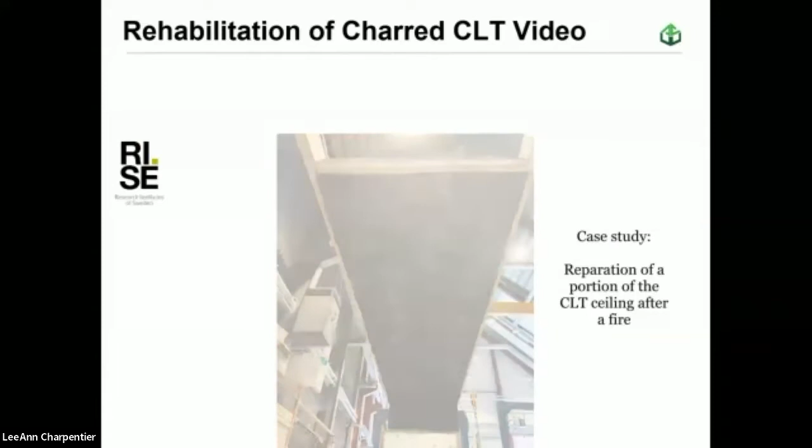After the tests were over, they cut out a piece of the CLT ceiling. They didn't restore it on site because of logistical issues, so they took it into a lab and put it at the same exact height and position it was in during the fire. Then they determined the depth of char.

That was step one. Step two, they designed a new CLT layup. They used gap-filling adhesives with 60 millimeter replacement glulam laid on its side with temporary tensioning screws and a veneer layer finish. That's the design they came up with.

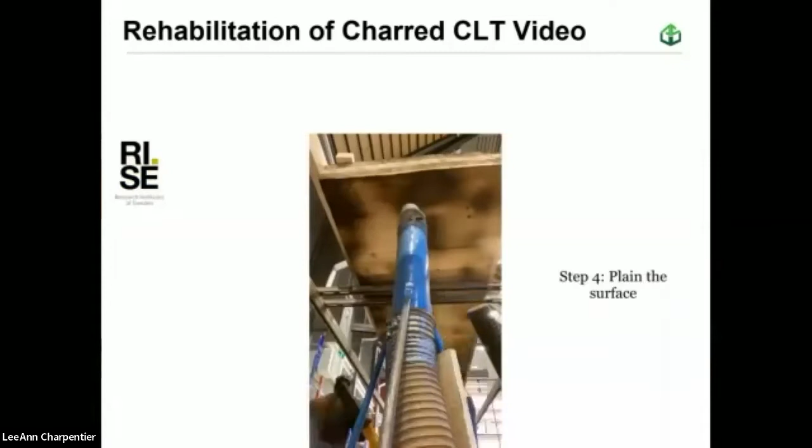So they plane everything out, scrape all the char out, sand it, plane it, and vacuum everything out, including the corners.

Then after that, they screw glue glulam on its side to take the place of what was planed out and what was charred away. Here you see that they're screw gluing and replacing the laminations.

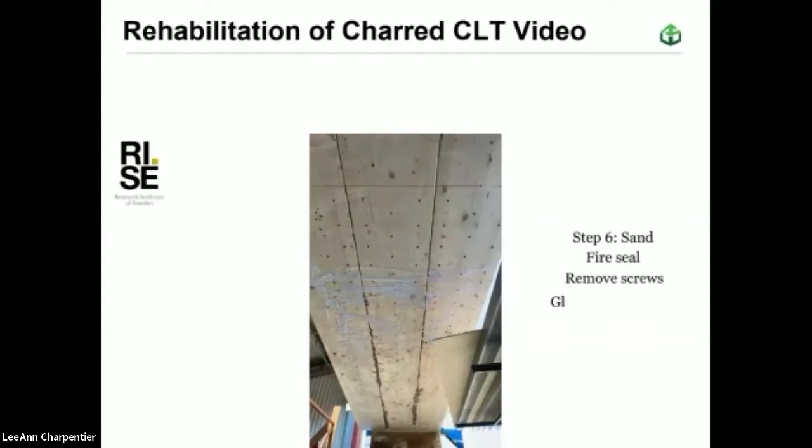Once they screw glue it, they seal everything. They actually remove the screws because the screws are metal and they felt they would conduct heat into the interior of the CLT. So then they sand it after removing the screws, and put on a veneer finish layer.

And that's the patch for the CLT. Here you see just a side view of the repaired or restored CLT member.

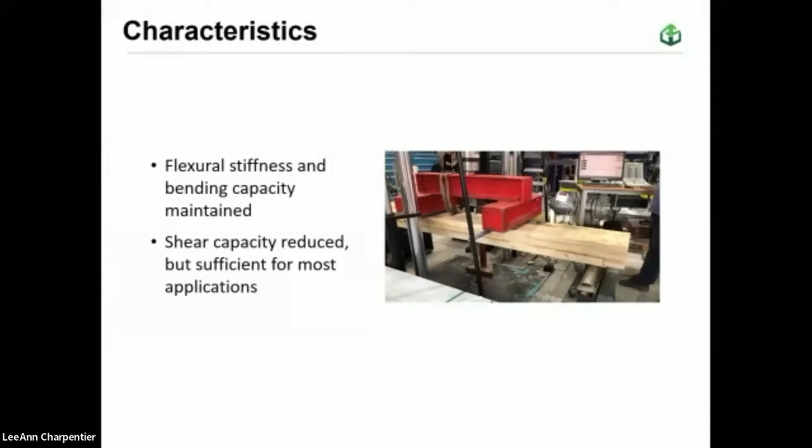And then they actually test it. They tested the panel after repair and found that the flexural stiffness and bending capacity was exactly the same. However, it did have reduced shear capacity, but it was sufficient for most applications. So basically, where you would have a relatively short span under a high shear load, this fix wouldn't be the best for it, but for most applications it would be fine.

Some of the conclusions of the fire testing: CLT is what makes mass timber buildings possible. CLT has been extensively fire tested, and it performs very differently in fire conditions than lightweight wood construction. In the IBC, it is associated more with type 1 construction than with type 3 or 5. The fire resistance ratings for type 4A, 4B, and 4C mimic the fire resistance for type 1, 1A, and 1B.

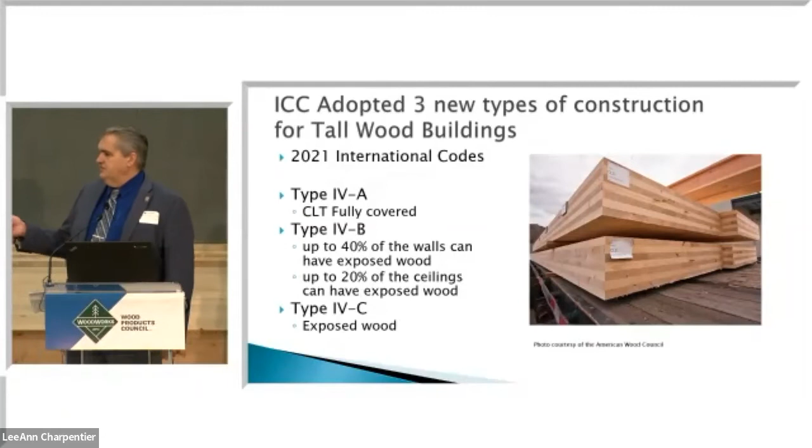And then we go with type 4B. This is where it's a hybrid, which is kind of different for the code. And we had a lot of discussions whether we should be doing this, but we did. Where we go, oh, you got to cover most of it, but we allow 40% of the walls open and 20% of the ceilings. And there are some ratios you can't do the 40 right to the ceiling. It's got to be separated out a little bit. And then of just type 4C, which is, hey, you can do the whole thing exposed wood.

So here's some examples. We got type 4A. Maximum height 270 feet. Maximum story of 18 stories now. We still have that in California, but you don't get height and area increase at the 18th story. But we added a lot of things.

We always want sprinklers. If you're going to build a smaller CLT, hey, you can build a type 5A or B, you know, and then you can get into the exceptions. But for this, sprinklers. You will see, I noticed on the table before, that there was some numbers for non-sprinklered. We have to have those numbers. I found out the hard way because when you're doing frontage, you have to have the base numbers to do calculations. So the primary frame ends up being a 3-hour assembly at least, okay?

And we got some more numbers. Another thing we put in there, if you go over 120 feet, stair tower has to be non-combustible. And this is for firefighter safety because we're going up that high. How long is that really going to last?

Do we have any other issues if it's spreading to our stair tower? And then concealed spaces. Yeah, we can have concealed spaces, but just like anything with NFPA 13, you have to provide protection per NFPA 13 because it is combustible inside.

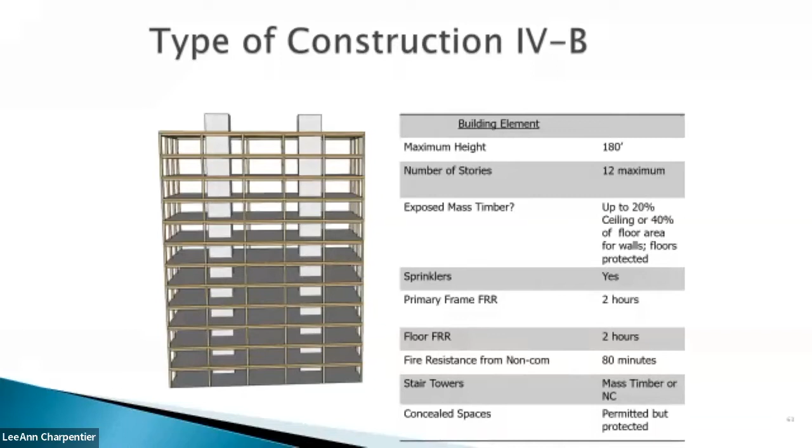Then we got type 4B, max height of 180 feet, maximum stories is 12. Same thing with the double dipping. Yes, we want sprinklers. Our primary frame is still 2-hour construction and fire resistant. 80 minutes, we're going down to stair towers. It can be mass timber, okay? And concealed spaces is going to be the same for all of them.

Type 4C. This is fully exposed building. So, hey, we give you 9 stories, up to 85 feet. Sprinkler, yes, still 2-hour assembly walls for the frame. And again, of course, the stair tower can be mass timber.

So, 2 layers on a 2-hour assembly already. So we're getting at least our 3 hours. And the exterior has to be non-combustible. Because we've looked at a lot of the fires we've had in high rises going up the side of the building. Numerous ones in Dubai that we've been watching and issues. So out there, over 120 feet, we need our 2 water supplies.

And a big one that came in, we need special inspection. And a lot of this has to come with a learning curve. Mass timber CLT construction is new. There's a learning curve here for everybody, from the industry to the inspectors.

I remember the first time I was out in the field and I found a flexible sprinkler head. You have no idea what it is. You know, you got to get the specs, you're looking at it. Oh, it's going to be the same over here. When we're looking at how do I do a joint, and joints are always the weakest point. So, special inspection, and we'll have a lot of questions.

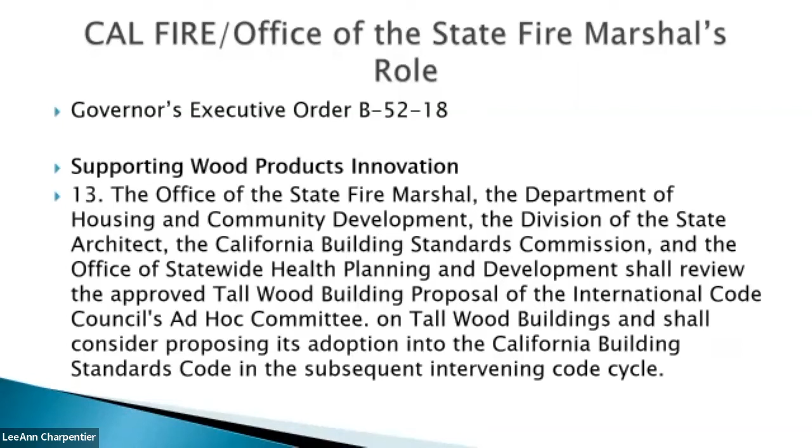On my next slide, the assembly also stepped up and put out a concurrent resolution saying we should really look at this. That started the State Fire Marshal's work group.

We got a lot of people together for this: the wood industry, HCD because a lot of this has to do with housing, DSA's very critical structural engineers who look at the structural requirements, the Building Standards Commission, the Building Industry Association, Board of Forestry, OSHPD (which wasn't a big player since hospitals aren't really their market because exposed wood isn't good for health issues), Cal Chiefs, government operations from the governor's office, CALBO, the Society of Fire Protection Engineers, ICC, and the iron, steel, and concrete people. It was well over 150 people on our work groups with interested parties.

We've been doing our meetings virtual and live for a long time, well before the pandemic, so fortunately all those people weren't in person.

We vetted these things out and looked at the way they did the tests. There were arguments about whether the fire tests were appropriate for CLT, but these are tests we've been doing for over 80 years. At the end we said, yeah, we're good with this. It's a 2-hour test, and we were looking at whether the safety requirements were appropriate. In the end, everything we did brought it to the highest level of safety that we could.

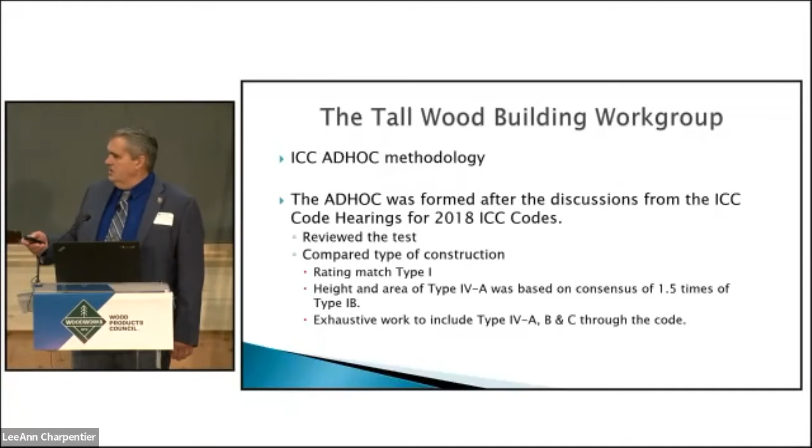I'll go quickly through this. What's nice about the fire test is I don't have to talk too much about it because we already had a presentation on it. I've watched all the fire testing - yeah, it's a lot of time - and I've become very comfortable with these.

Do I have concerns? Absolutely - that's my job, I look at where the problems are. I have questions on how you repair the panels. I actually enjoyed the testing they did on panel repair, but I see it's going to be difficult. Hopefully that won't come up too often, especially if the fire sprinklers work - we're really not looking at that issue. All the testing was about worst case scenario: if this system fails, what happens. At the end we were going, wow, it came out pretty good, because believe me, we were looking for anything wrong we could find with it. That's our job.

So there was a lot of discussion, especially on the structural issues. Now, I am not a structural engineer, but we did have structural engineers come in, including the state DSA's structural engineers. We talked about seismic, and in the end the code didn't give away anything - they have to meet the current standards. Nothing has changed; it is the code.

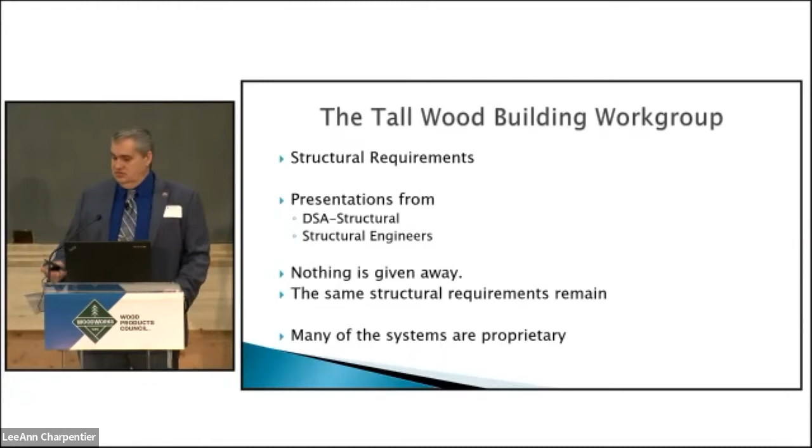That being said, we brought it in for the 2019 intervening code cycle, and that was a big lift for all the state agencies. For those who still have the hard book copies of the codes, that supplemental was really large with all the blue pages, and this is one of the major reasons why. We adopted it through the State Fire Marshal, HCD, Building Standards Commission. We all did a joint adoption of this.

Let's see, the only changes were on the height and areas. And of course, I get to do the work again, already did, for the next cycle, our 22 codes. We had to repeal all these sections and adopt the model code to change it from italicized font to regular font. No change, looks the same, except the font is different because there's no longer a California amendment, it's now model code. So you'll see a lot of pages and a lot of work that was done coordinating with all the state agencies to get this in early, and it is in effect now.

So it's already here. We realized it probably wasn't going to be utilized very quickly, but this met the goals of: it's here, you can do it, and it's a huge sign to the industry that it's here. They can start preparing, and there's a lot of things we already talked about, like forest management and the number of supply chains that have to happen to make this work. It's a big deal. Having that 18 extra months, knowing it's coming and it's here in California, gives them more time to get that done and speeds up the time frames.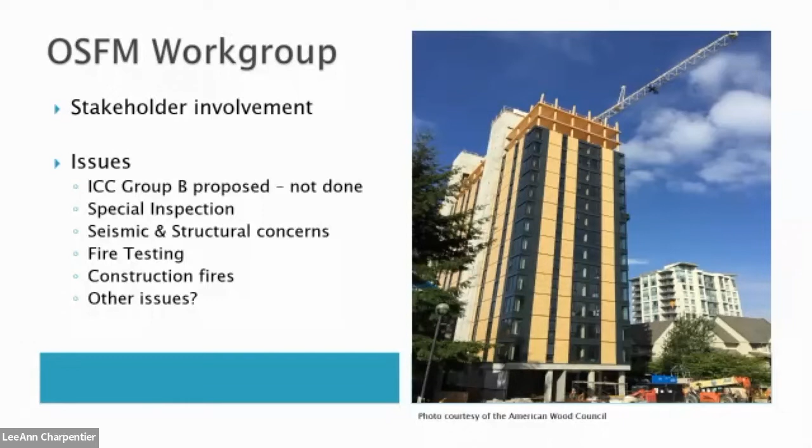So it says 4 meetings. I swear it was more. It felt like a lot more. They were long meetings.

So we finished up in 2020. It was finally approved, published, and effective. And so you'll see it, of course, in the next set of 22 codes.

That's all I had, because everything else has already been covered by the other groups. But I am open for questions—it's a topic I love talking about.

As often happens with the building official—thank you. The question is about special inspection: what are we looking for in special inspections? Most of the ones I'm concerned about are the joints, where your wall joints come together. Now, I'm speaking from the fire side—your structural engineers and building officials will probably answer that slightly differently. But I'm always looking at where my wall assembly comes to the floor assemblies. That's going to be a weak point, and the way they are connected. From a structural engineer's view, you're looking at how things are connected to make sure it's done correctly.

The question was, how do we determine who's qualified as a third party? ICC and some other organizations do have training programs, so you're looking that they have some certification that's being worked on right now. It's the same as you would with any other special inspector.

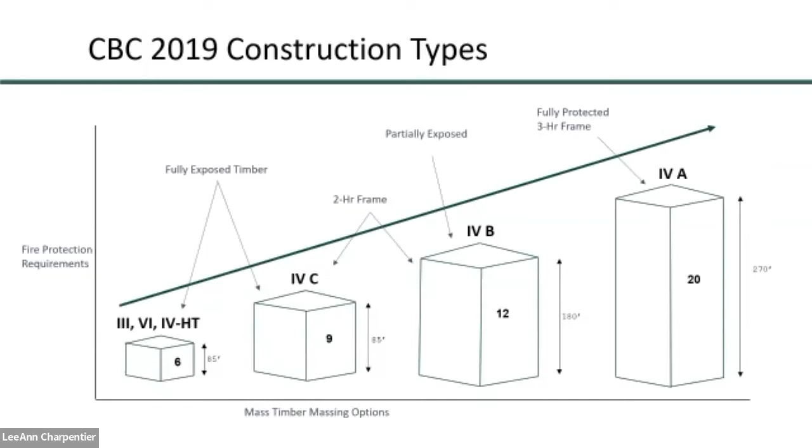The hot topic, which has come up in a number of conversations today, is really about how much mass timber we can expose. Type 4C, on the bottom there, allows us to go up to 85 feet. We can have a slightly larger floor plate, like 1.25 times what Type 4 heavy timber allows, in a 2-hour rated structure, which can be fully exposed, noting there are some requirements for shafts, etc., to have protection as well.

Once you go above that 85-foot criteria, you get into high-rise buildings. We can utilize Type 4B and Type 4A, usually using the same structural floor system, 2-hour rated. As you get into Type 4A above that 180-foot height, we get into a 3-hour rated structural frame. So again, we're looking at these buildings comparably to Type 1B and Type 1A, as Greg mentioned previously.

Really, the key part here is how much mass timber we can have exposed. In Type 4B, we allow 20% of the ceiling area, in relation to the actual floor area of a fire area or dwelling unit area, or up to 40% of the wall.

That's the current provisions. As Greg and Ray mentioned, the new 2024 code changes, based upon the RISE testing, will change those provisions to now allow 100% of your ceiling area exposed, in relation to your floor area. So if you've got a flat ceiling and a 3,000 square foot unit, you can have 3,000 square feet of exposed mass timber. If you have beams, you'll need to incorporate the area of those exposed beam areas as well—I'll get into that more.

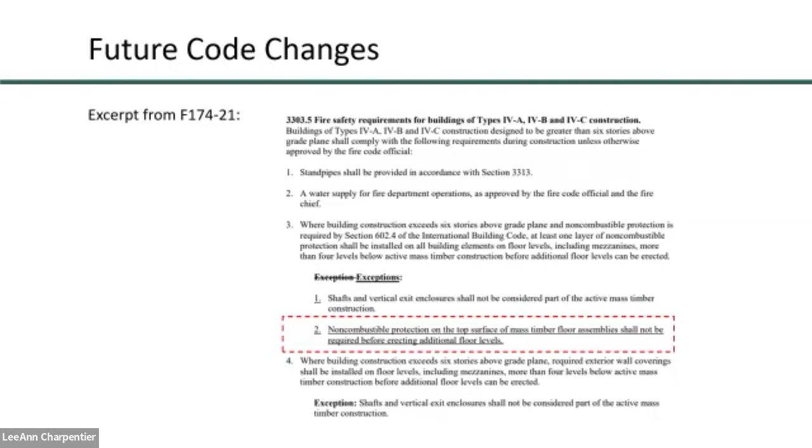Cost is a big one. We're all running into cost of procurement of products—steel, concrete industry. Now the stresses that social and global impacts are having on the ability to build, as well as the ability to have labor on site and secure labor within areas such as the Bay Area—it's a high labor cost environment here.

Aesthetics is definitely key—any architect who wants to build with mass timber, their number one goal is really to expose that aesthetic of mass timber. It's a warm, inviting environment, driven by the ability to expose your structural system now. We don't have to use high carbon offset or high carbon production products like gypsum to encapsulate these members, provided we can work within the code or through a performance-based approach.

And the construction schedule—obviously the ability to now look at kit parts or off-site fabrication, getting factory workers in clean, consistent, and healthy environments to put these panelized products together and then ship them onto site, where they can be craned up and erected fairly quickly. It's a much safer and much quicker process to erect these buildings.

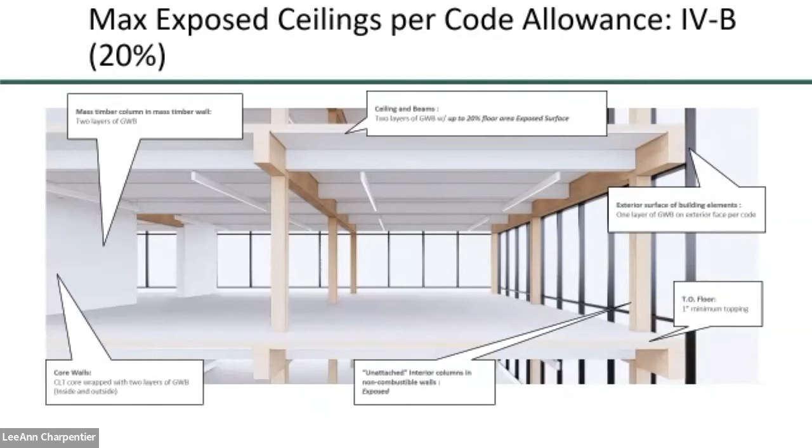And then really getting into where we're heading, where the code is heading now, and where a lot of clients want to go with regards to protecting their aesthetic drivers of projects, is 100% exposed. The aesthetic quality we get from these buildings, as well as understanding the fire dynamics and fire concerns for these environments.

I'll quickly go through this, but this is a framework of establishing fire safety design for mass timber buildings. We go through Table 601, which outlines the fire rating requirements for the structure, and the interim code now incorporates the new Type 4C, B, and A provisions as well.

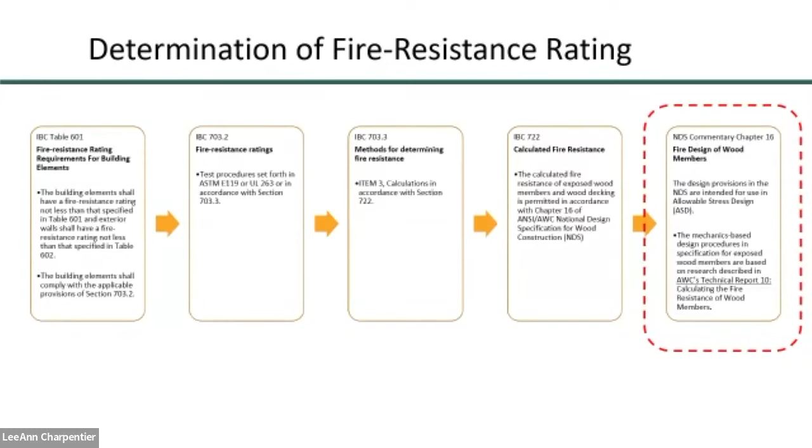For wood, we have fire resistance ratings determined in accordance with Section 703, or through other methods of determining fire resistance through calculation or engineering analysis. Then we get into 722, which outlines the criteria for wood design, which sends you to the National Design Specification, Chapter 16, which also references Technical Report 10, containing some additional technical content for wood design.

Really just to highlight the ability of mass timber - obviously it burns, but it develops its own protective layer and char. It's understanding that through a number of tests and historical use of mass timber, type 4 heavy timber, years of using the material and research has shown that there's consistent charring performance to these materials, so we know that we can calculate it.

As we're getting into newer testing, like the FPL testing undertaken in Wisconsin, we're really understanding that as we get into larger char rates or larger elements with 3-hour tests and more, we're actually seeing that the char performance improves markedly because we're getting much larger insulation provision from the char. So we're actually seeing reduced char rates when we get into longer fire durations.

Really, the basis is we either have an exposed element and we're adding on a thickness of wood to accommodate the char, so we maintain the sort of minimum dimensions as required for the structure loading, and then we add on an additional 2 inches or 4 inches easily to provide your 1 or 2 hour rating.

The other way to look at it is if we can get all of the rating provided by non-combustible protection, so we have the minimum cross sections required for structure, and we add on, let's say, gypsum board to give us a 2-hour rating to protect that structure.

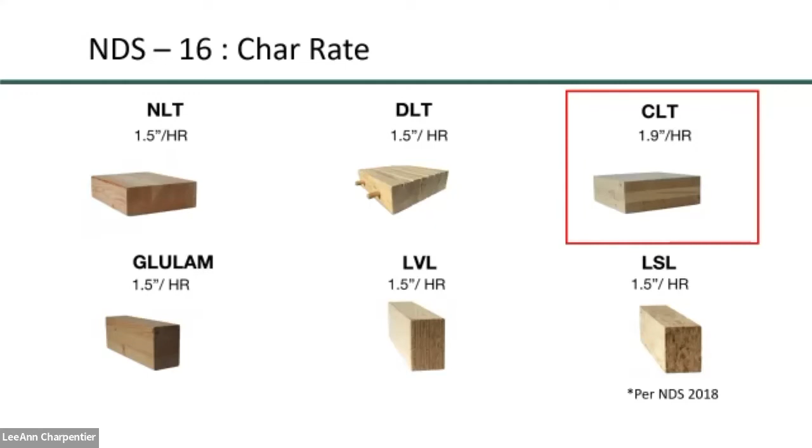Again, it was touched on before about the connection design. This is quite an important part of design. The building code has traditionally been pretty quiet on connection designs for steel and concrete design, and basically protects it the same way as you would protect the rest of the structural elements.

Wood would be a little more specific here because the connection design is a very important and critical part of the design. So there's new criteria now built into the building code that establish additional criteria for what the joint must meet—temperature criteria similar to those for a wall or floor condition, for insulation criteria, to avoid high temperatures to the wood so we don't get degradation of the wood strengths. That's around 250 degrees Fahrenheit.

We don't get at any one point an increased temperature of 325 degrees. So it's basically an average temp of that joint criteria and a maximum temperature point. This is really looking at steel joints, with wood supporting that.

So at the moment, the ways of meeting those criteria for a concealed joint condition are: one, undertaking fire testing, or two, undertaking a fire engineering assessment, which may be in the form of a finite element assessment.

We can build this model up, or build this joint detail up, into a 3D finite element model, using testing such as RISE fire conditions and ASTM E119 fire conditions, to really understand what we need to do to that joint to meet these thermal criteria. Part of this process is helping work through with jurisdictions to understand what these criteria mean and how we can show that joint meets those criteria or exceeds them.

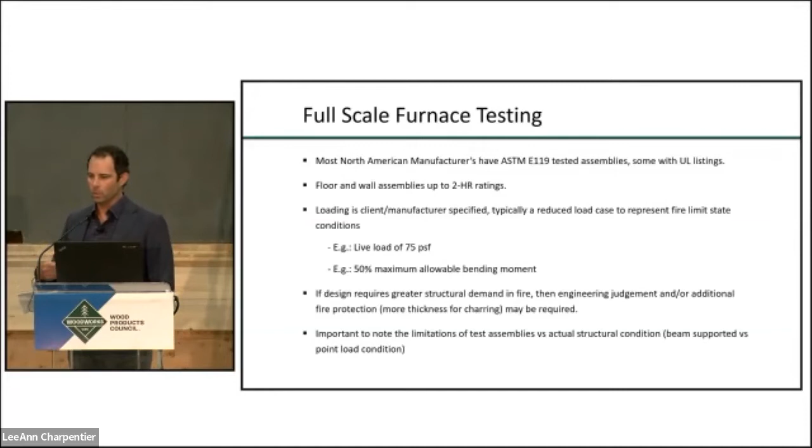It's important to note that where we have different loading criteria undertaken for those tests, the load conditions imported or used in that testing criteria may differ from that used in the actual load for the building. We need to take that into account, working with the structural engineer to make sure we're applying or validating the design as opposed to the testing criteria. That's all accounted for again in the National Design Specification.

So when we get into the value-added design process, we're really looking at how do we now start to achieve some of these goals that clients want, like exposing more mass timber, while also dealing with a lot of things the industry just hasn't caught up on yet—things like penetration details, edge of slab, head-of-wall details—these things where we just don't have listings we can go to and say, hey, there's a listing, pick it up and run with it.

So there's a lot of things where engineering judgment is needed—all these details have to be worked through early with the jurisdiction to make sure that we've got a path forward.

So really focusing on the IBC or CBC 703.3, or the 104.11, or in combination, these alternate means and methods, and really focusing on these six criteria—making sure that if we're doing something different from the code, or it's an alternate strategy, we're showing that it's equivalent, if not better, in quality, strength, effectiveness, fire resistance, durability, and safety.

I'm going to go through and try and get you to follow this, but really this is kind of like an event tree analysis, or something we use to convey that with clients, to help work through all the various different points that we need to address with this system to get to that equivalency and safety.

So it's really just making sure that we're understanding all the performance requirements, the testing requirements that we need to address as part of this overall assessment, and then bringing in codes like the ICC Performance Code and other standards and guidelines in the industry to support a robust assessment.

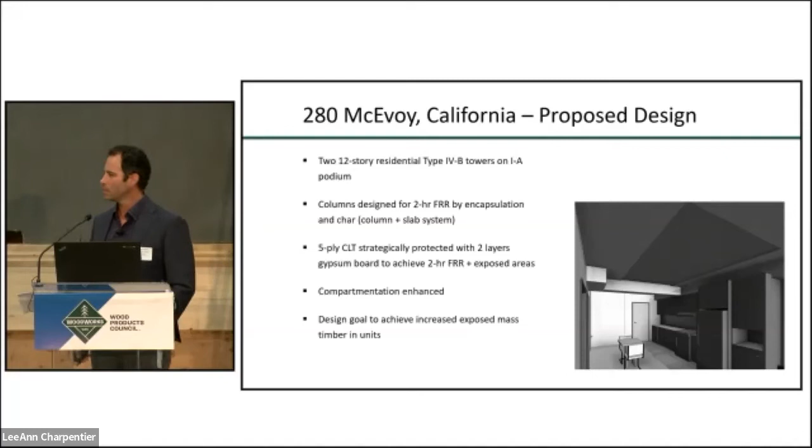So we run this through a finite element model to really understand—what we represent here is essentially the top of that connection detail and then the bottom of that connection detail.

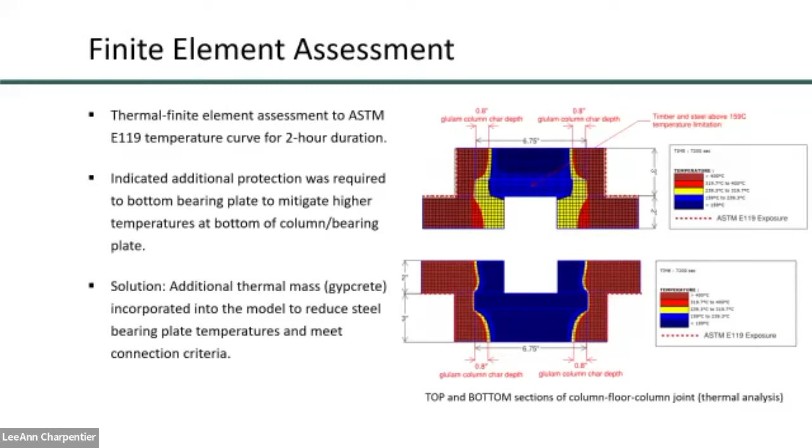Some of you may be familiar with some of these details you've seen through the jurisdictions. As I mentioned, there's a lot of catch-up in the industry regarding things like head-of-floor penetrations, edge of slab details, etc. We're relying a lot on manufacturers to provide engineering judgments that support our own engineering judgments or alternate means and methods going through the jurisdiction.

There's a lot of testing being done for the concrete and steel industry, and we're adapting those engineering judgments across to the mass timber industry. We're slowly seeing companies like Hilti and others starting to test their products on mass timber assemblies only, and we should see that coming out in the next month or two, better supporting edge slab details on CLT only without a concrete slab. But at the moment, we're having to adapt assemblies we already have in the industry to a mass timber only assembly.

Here's an example of running through these, but it's important to work with the team early on. I know quite often these things are left to CD and figured out during construction. We're starting to coordinate these early because we need early coordination with a testing authority to get these details figured out, and then work through the jurisdiction through an engineering judgment process to nail these down, so we're not trying to figure these out during construction and slow things down—because you're affecting concrete pours and the ability for the facade assembly to go in place. It's really about front-loading these aspects early and getting them nailed down as part of the design.

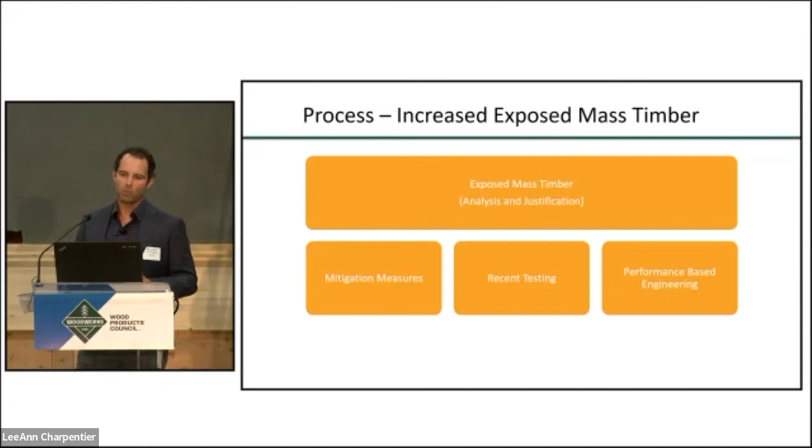I won't go through this, but this is essentially the ATF testing, which provides data we can rely on and compare with as we get into predictive modeling. This is the FPL testing, which hasn't been covered too much, but it identifies a test for a type 4A connection—really a 3-hour beam column connection. They showed that this beam column actually lasted in the furnace for over 4 hours.

And this was designed per the NDS, under the NDS char rates, to maintain a structural loading for the 3-hour period. And it was still in the furnace after 4 hours, maintaining a structural load. So we start to understand as we get beyond that 2-hour fire performance, char rates start to reduce as we have a thicker protective layer to that wood.

And then the RISE testing, which Ray had gone through in the past. So really pulling that all together, we're looking at the current provisions in the code that relate to the NDS, or sorry, the manufacturing standard for CLT, which is no longer used in the industry. We're now using PRG 320 2018, so we've addressed the issue of delamination of those products. And so we get into use of thermally resistant glues, and then also looking to utilize the recent testing done by RISE and others to inform changes to the code.

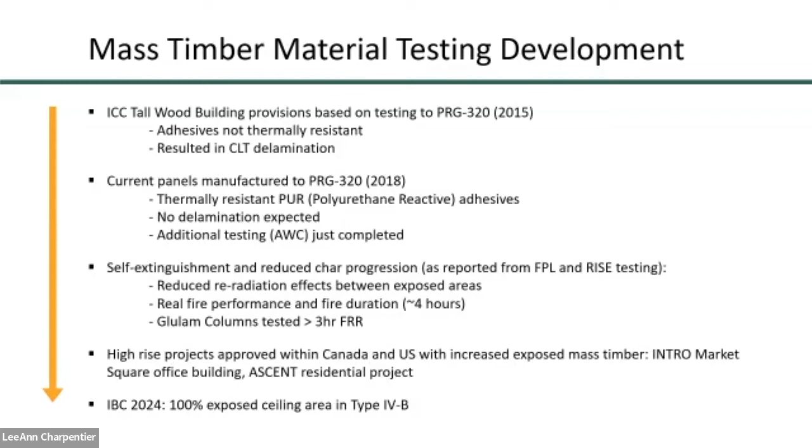So we've seen the adoption of the Tall Wood Building provisions in the California code now. We'll see changes to NDS design specification for new char rates to CLT, and also those IBC 2024 provisions. Hopefully California will adopt those earlier. But this alternate means and methods process, 104.11, provides an avenue to be able to bring in that testing earlier as a full engineered approach.

Again, part of this is understanding the results, data that's come out from this testing, and then the ability to replicate and model that when we're looking at a commercial building or a residential building. So essentially understanding where we have exposed mass timber within a building, how much we're exposing, what are the compartment dynamics, how much ventilation we have, and then build that into a model with regards to fire cases, fire load duration, and how much thermal exposure, temperatures in those environments.

And we can compare that against the RISE testing and other tests that have been done to validate the predictive modeling. You're really bringing it all together as an approach of showing that we're allowed or able to expose more mass timber.

Obviously, part of that is improving mitigation measures. Maybe we're bulking up the sprinklers, improving the compartmentation within a unit, upgrading, providing additional smoke detection within the spaces, or additional provisions for the fire department to be able to access the building and undertake firefighting operations.

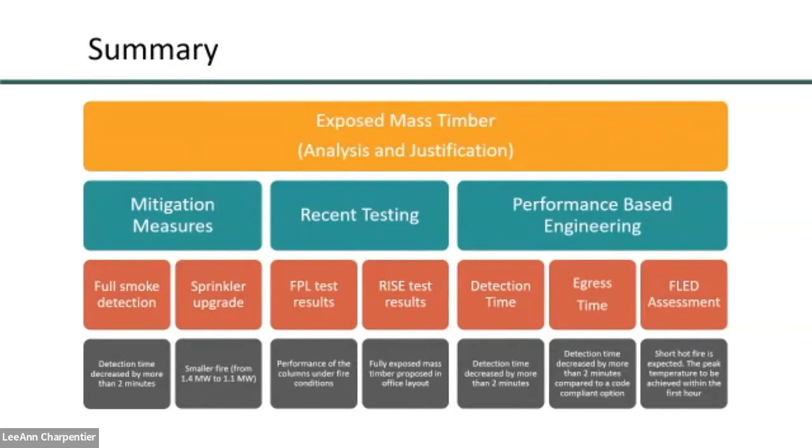The RISE testing that's been done supports the improvement of products in the fire industry. And then we're looking at performance-based design. We can do smoke and heat modeling to understand the dynamics of the environment, egress modeling to show that we can get people out, and also making sure that we're supporting fire department operations.

I won't get into too much of the minutiae there, but that's really encompassing this whole thing into an overall engineered approach to work through jurisdictions. So that's where I'm going to leave it. I think one of the topics I didn't touch on was really safety during construction, but maybe we can hit that in the panel if someone has a question on that as well. Thank you.